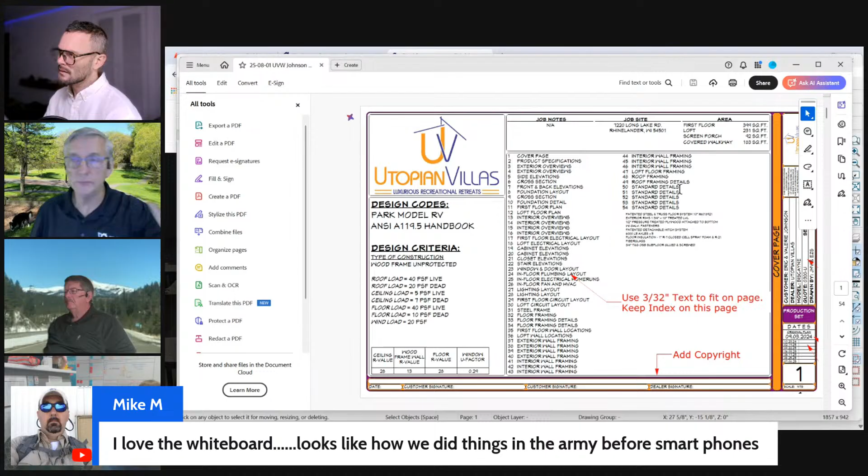Thank you. All right, so a couple of caveats here that we have to be aware of. They are on X15, and I'm going to be doing this in X17. So we'll try to point out some of the things you can't do on X15, but you can do on 17. So a lot of things I'm going to talk about you could do on X15 as well, plus it's all on 11 by 17.

So just keep that in mind, you guys like that size, you want to continue using that size. Some of the things I'm going to say won't apply to your sheets because we already talked about it, but I'll explain some things generally so people can understand.

Is this new construction or remodel? This would be new construction. This is a tiny home that we're going to be talking about. Okay, so that's a tough one.

11 by 17 for new construction, yeah, but they do a ton of detail. So we've got 54 pages that we're working with here. If we can reduce that a little bit by combining some things on different pages or making it fit a little better, we'll try to do that.

But as we run through the different pages, go ahead. You also need to remember that it's a tiny house, so they're still getting the quarter inch scale on 11 by 17 with no problem fitting everything in there. It's still tough to get in there if you're using keynote schedules or schedules in general and you want your eighth inch print size. That's tough, and you'll see some of that here in just a second.

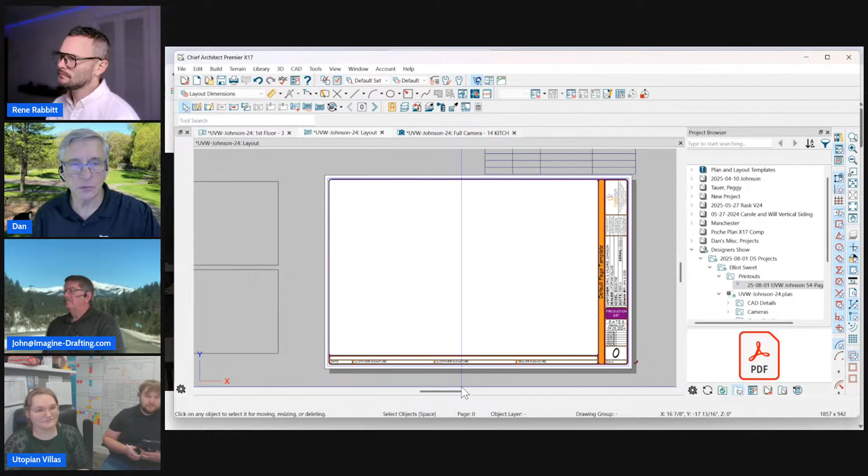So let me start on page 0. Of course, that's your master border. And so down here you're using the page number, which works great when you are using just page numbers, not A1, E1, those kind of lettering.

So the page setup in Chief works fine, the page macro works fine, and that ties into the callouts, which I'm going to talk about in a little bit. If you're going to go more complicated on the page numbering with the A1, E1 kind of letters, you do have to use the layout label. I added it here so you can see both at the bottom of the page.

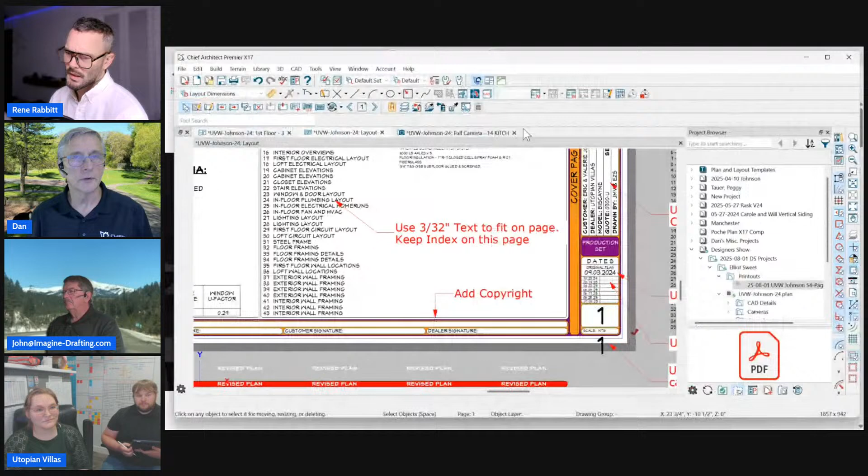So when you use the layout label, that's when you're going to use this icon right here, or you're going to go to Edit page information. Or you're going to go over to your layout pages and right click on the page you're working on and edit that page information. This right here is the same as clicking this icon up here, so they both do the same thing.

So if we go into the page information, the pound sign, this is where you would have set up the page numbering to be different. A-pound sign would be A1, A-pound sign would be A-2. So Chief would start the page numbering over each time it finds a new symbol in front of the pound sign. I don't know if it works after the pound sign or not, but just be aware of that.

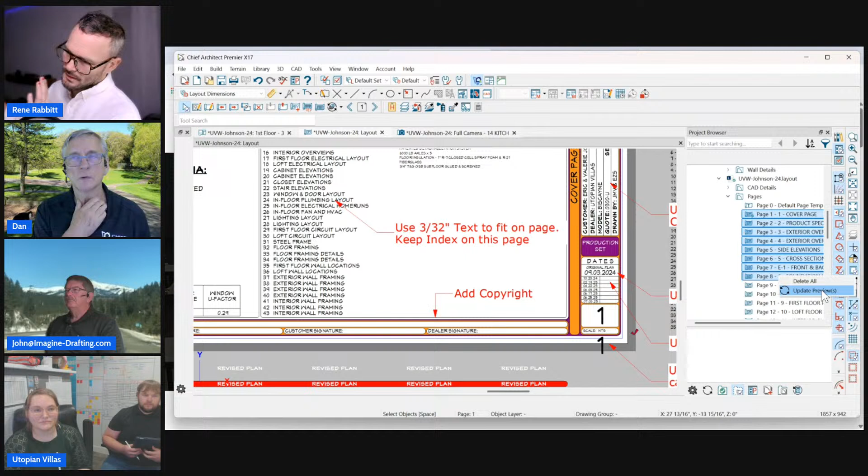Can you group edit page information from the project browser? No, all we could do is delete, and we could update all the previews on the pages we've selected. Unfortunately, if they wanted to delineate A sheets from E sheets, they'd have to go through every page, each one. Unfortunately, it's not a big deal once you do it once, it's part of your template, and you can just work with that. It's almost like there's a suggestion in there somewhere.

But if you're building this from scratch, you get one A pound sign plan page in here, and then duplicate that. Don't make a new page, don't go a new page. Duplicate the page, and the A-pound will already be there, so you'll be able to go with that. So Elliot and Jen, you guys are good with your page numbering setup that you've got, so you wouldn't worry about that.

Let's talk about your indexes. You're on X15, so what I'm going to show you won't work in that version. You would have to update to X17, but there are two suggestions here.

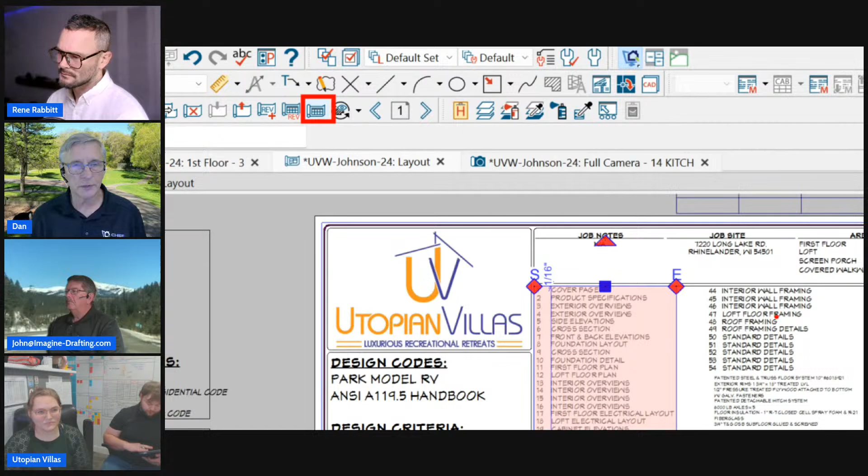All right, so you've got your page index. That's this little icon right here that allows you to add an index of all the pages on your screen. And the index will pick up either the page number or the number that's put in under the pound sign, the label, depending on what you've selected to display the page number.

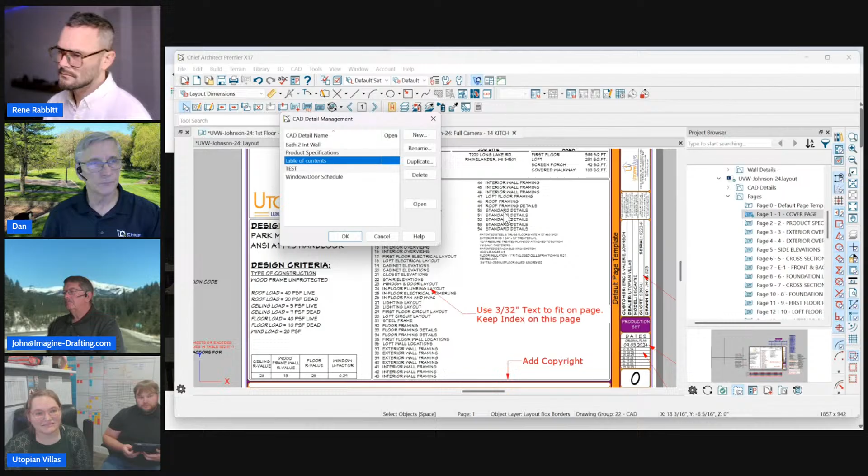So here you see that I did put, I must have changed it back, I had it on one page. But what you could do here, with the text size you've got, is put this in a layout page CAD detail. So that table of contents is in a layout page CAD detail, and I understand why you did that, because you needed to break it to show two different columns. You want to show how that's accomplished, Dan?

That's a good one. Let me show one other thing first.

The text size used here on the layout page was 1/8 inch tall. Now, architectural standards state you could do 3/32 of an inch tall for text size, and that's a standard text size that would work fine for the index. So this is the index at 3/32 of an inch, and that fits in one column. All your 54 pages fit just fine. So that's an FYI for you.

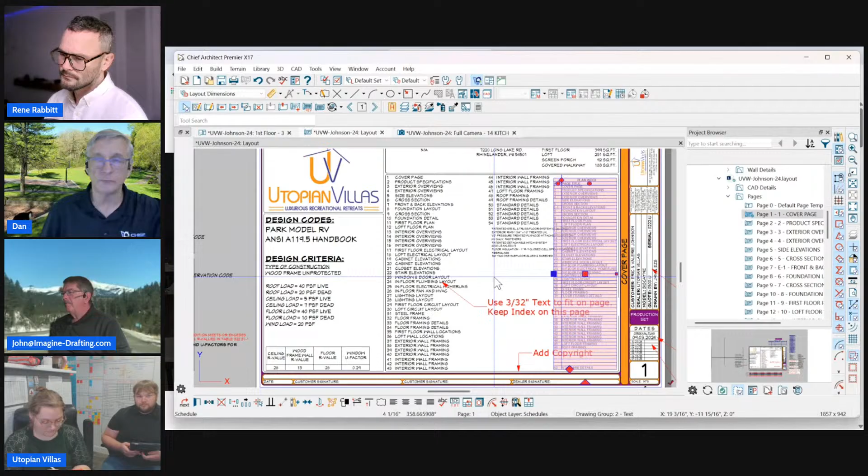So you could go down a little bit smaller on your text, and that gives you one column for all your pages, and then you have a little white space to throw some 3D views or something nice there, maybe some other notes, and then you wouldn't have to break up the columns.

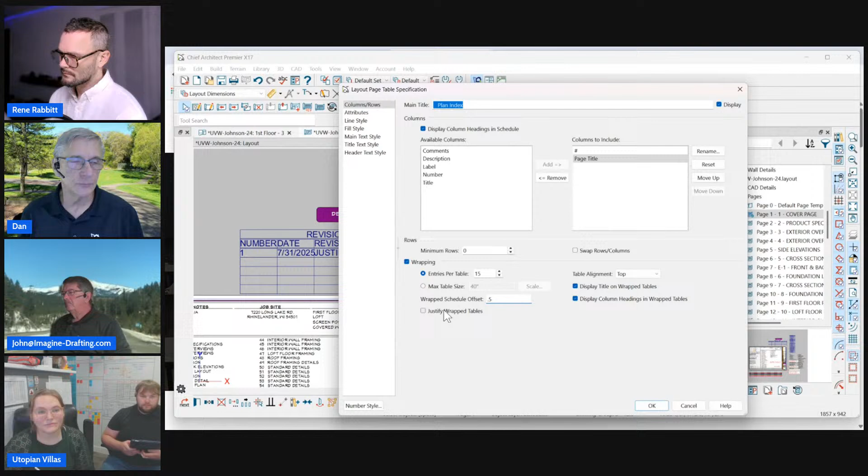Now that we're on a layout page, we were playing with this yesterday where we put in 1/4 inch, and of course it didn't do anything, so we had to put in a big number. Here we're just going to do 1/2 inch because we're on the layout, and that would already give us the space we need between columns. When I click OK, there's your multiple columns of pages automatically, and there's that 1/2 inch space I put between them. I could make that smaller.

This is huge, I think. Chief adding this for all these big schedules people do. Definitely, yeah, that was my favorite feature they introduced. Oh come on, you said other ones were your favorite. What are you doing? No, that was from the get-go, that was the one, yeah that's a good one. That saved me enough time to make up the cost of the software right there. Yeah, and then you start adding some of the other ones in, and before you know it you've got a really good thing going there. So I know Robin really loved that one, she's a big schedule nut, so she loved that one quite a bit.

So you see how that works? Pretty slick. As you keep adding pages, it will automatically start a next column based on the number of sizes of pages that you put in. So that works with all schedules in Chief Architect.

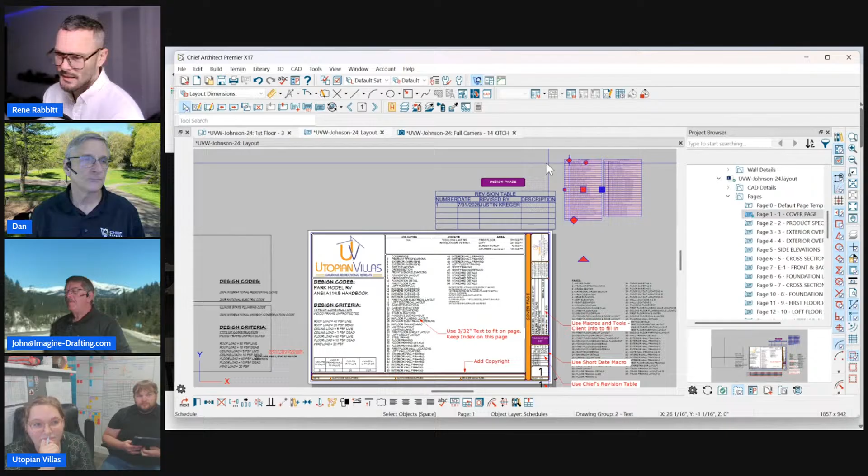Let me break in and say I'm just a huge stickler for standardized text through your layout. Whatever text size you're sending from plan, match that text size in layout, have all the text size be the same. When it starts jumping from scale to scale and size to size, it just becomes more difficult to read for most people. So if you're doing the text in Chief and printing something at 1/4 inch scale, the text size in Chief would be 4.5 inches. Just keep that in mind.

We got a comment here from Lance. What's Lance got? Did you set up multiple template pages that auto number A sheets, E sheets, S sheets? Can you set up multiple what now? Layout templates, template pages that auto number. Yeah, A sheets, E sheets, S sheets, and yes you can.

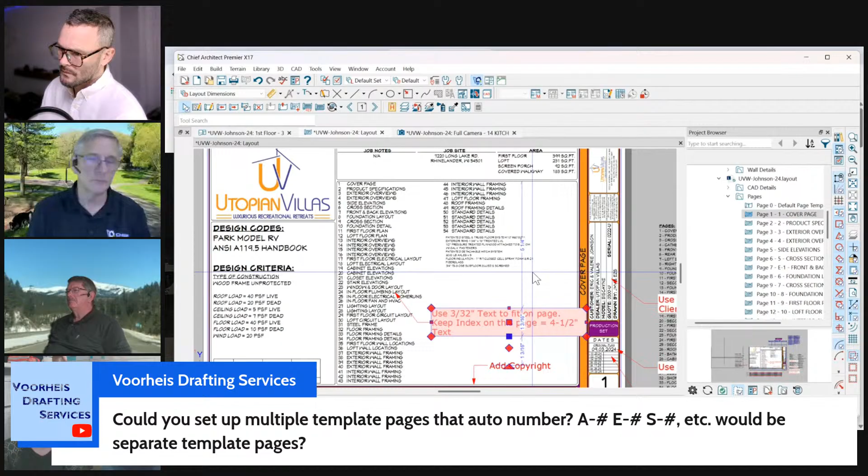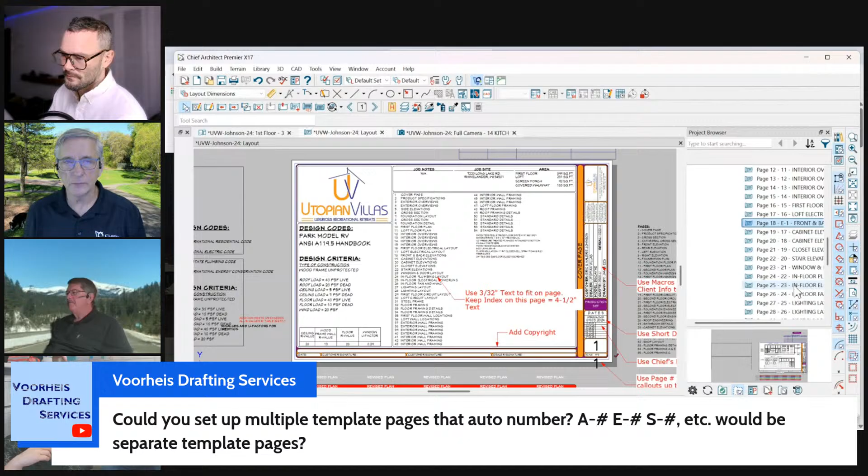Within the same layout, yes, you could have separate layout templates. Although I would probably just start some sheets further down the line that start with your E sheets, that's easier than setting up different template pages. Yeah, and then duplicate them as you go. You can keep it all in one template. Everything's one template, it doesn't matter where you put the next lettering. I could move that down here and it's still going to stay E, and everything else stays lined up. So you can move those pages around anywhere you want, just like Rene was saying, and they'll work just fine. So that's that kind of lettering.

But if you wanted to create separate template pages within the same layout file, all you have to do is go to a page where you've set up a border, go to your page setup, and make that a page template. Now that becomes a new template.

Or actually, that's not quite true. What you would do is name this page—what would it be called? Production specifications. Let's just see how this works. See how everything went away from page 0's information.

And if I go to the next page and want to use that template, I would just go here and select it, say use that template, click OK. Now I'm using that template. So you could switch that up at any time through the process.

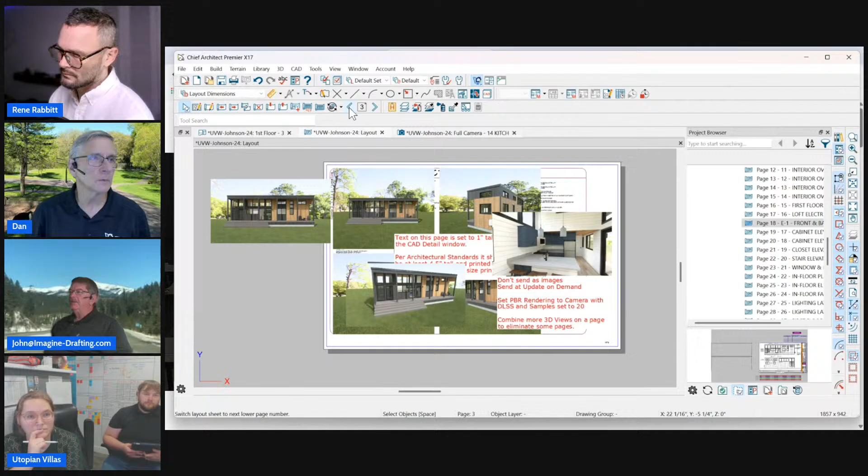And again, for the page lettering, to keep your borders the same and everything, you'd have to go to page 0, copy the borders in your title block, and then paste it onto your new template.

If all you were trying to do is change the number, you could just duplicate page 0. Duplicate page works. Yep, that works too.

So you could do that all day long. Once in a great while, I'll use another template within the same layout where I'm bringing in a survey or something that takes up the whole page and I don't have room for any of my stuff. Then I'll just create a blank template and put that on there. That's about the only time I ever use separate templates in the same file, and it works pretty well.

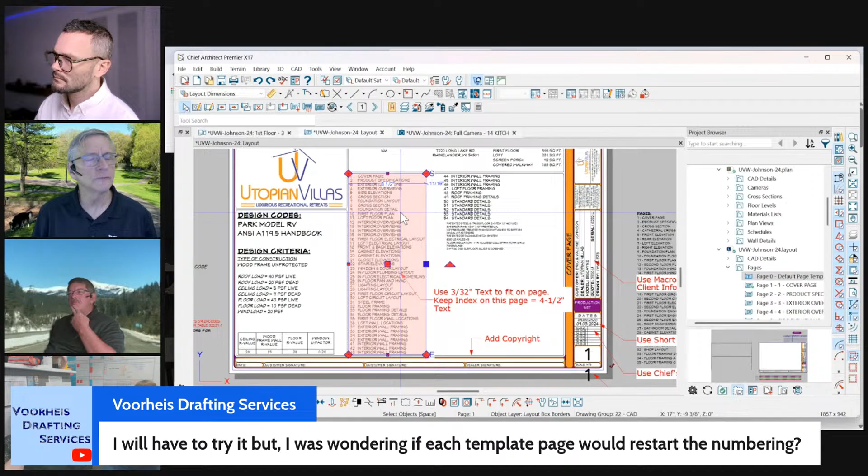So the answer to the question is yes, it would restart the numbering from whatever—actually, it would restart it, wouldn't it? I wonder, would the index pick up all the pages if you're using a new template? I've never looked into that. Why don't you play with that, Rene, while we're talking?

Oh yeah, it does. Okay, so one index keeps everything in order, as long as it's in the same layout file. Okay, cool. Alright, so there's that.

One thing you might want to do for your plans is add a copyright—your company name with a copyright symbol. I think that'd be a good idea for what you guys are doing. You make a little note of it here, like don't make a copy of this or we're going to come and get you. But yeah, you might want to add a copyright symbol to your plan, just like I do.

Let me open one of my layouts. New—here I can open up a different one. I'll just open this. So I just have a little note down here: copyright, my company name, don't make copies of this.

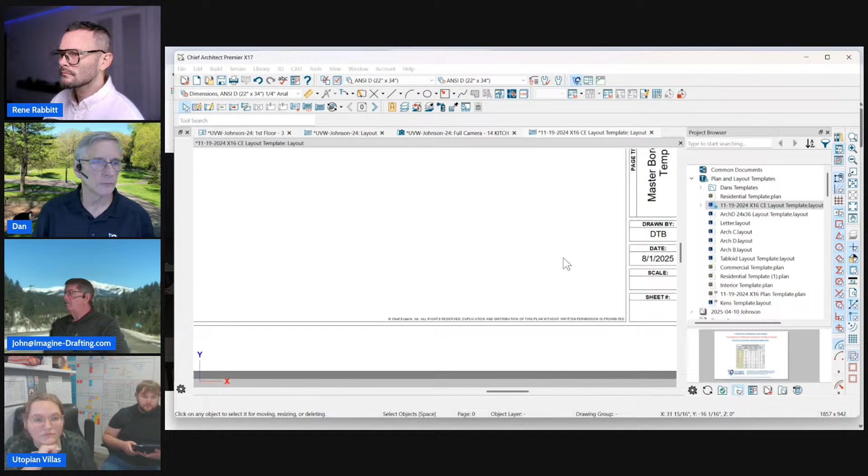Alright, so Margaret had a question too. Yeah, what you got, Margaret? I'm ready—how does the multiple dates auto-populate as you work on different parts on different days? I assume that's what she's getting at.

Well, if you're talking about the dates down here, okay, that's just something on page 0 where they're adding those dates to a little graph they've laid out, so each time you open it and change it, you might go in and change that.

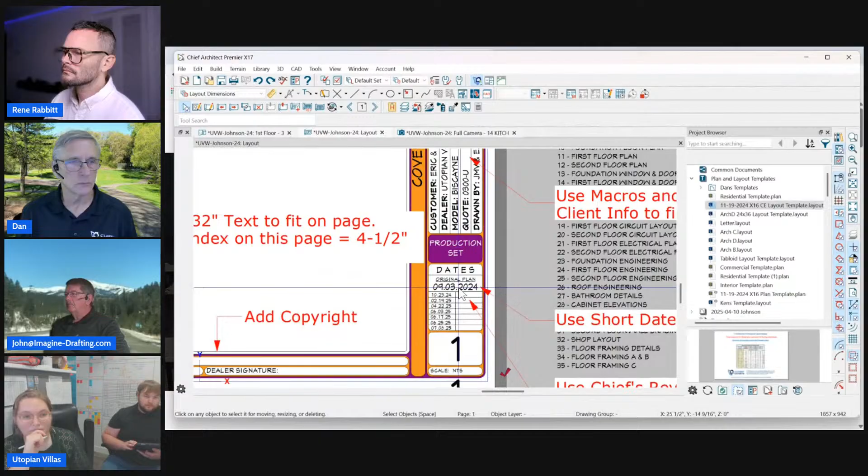I'm the kind of guy who just uses the short date macro. So on page 0, I would put a text box. Let me get a hold of it and open it. So every time I open the plan, it's always going to have the latest date.

So you just go in here, create that macro, global—we want to go to time and date, and I use the short date. So every time you open it, it's always going to put the short date in that box for you. To get this running view here, you'd probably have to create a custom macro for that, right?

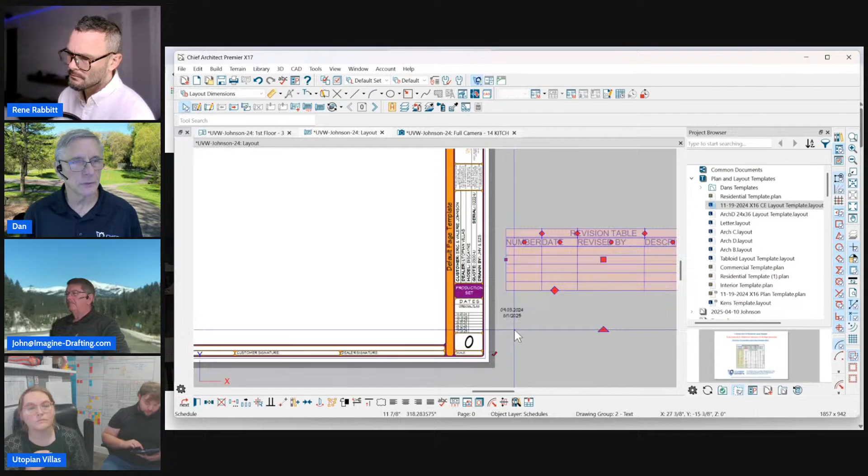To get this, that can be a revision table if you wanted to. Exactly, okay, that's what I was going to say. So you could take this revision table—and the way revision tables work, just make it small to fit in there, adjust the columns so they only have the date. And if you wanted a description, you could have it. So we could remove those and just go date.

And then what you do is, whatever page you're on, you change the size of the text and all that stuff.

So whatever page you're on, that revision table will show up on that page. If it's on page 0, it'll show up on all the pages. And you've got two options here.

One, we could go into the page specifications, and under page revisions, what I could do is create a new revision, and put... let's just put a date there. I'm not sure which column it was. So that's current page. We're only going to put this date on the page that we're on right now.

Or you want to put it so it's on all the pages throughout your entire layout. So you can mix and match these on your revision table. And when you click OK, that's going to show up on your revision table, and you'll be good to go.

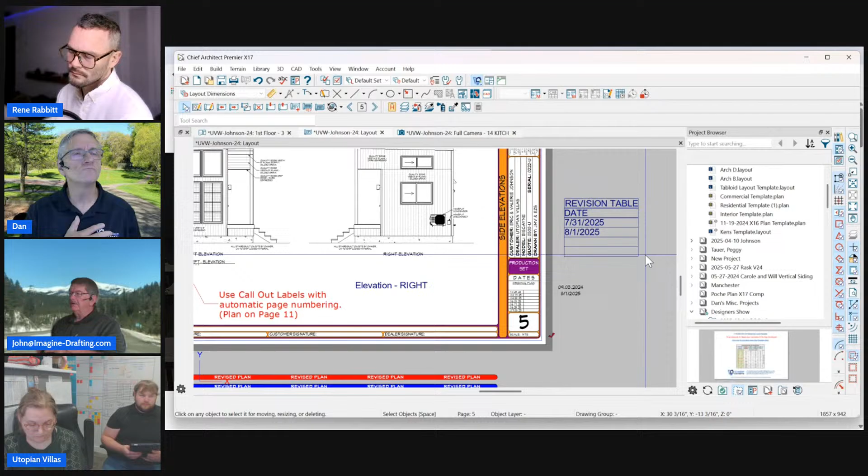So if you wanted to have a master revision table too, would you be able to put another revision table off to the side like this on page 0, and have that populate for all your revisions you've done? I don't know, never tried it.

No, see, it picks up what I put in for this page. I don't know of any. Maybe if it was a different template. What was the question? I missed it.

So you want to have a master revision as well, right? So you can kind of look down chronologically what happened up to everything instead of having to flip through pages. But you also want to just show on that page how that page got changed on each page, right? So you'd have a master one on page 0 off to the side, but that's not going to print. But it gives you chronologically everything that happened.

Yeah, you could put that on page 0 and see everything. That would be a way to do it. You'd have to update it twice though, right? You'd have to put it in for the one and then put it in for the other revision table.

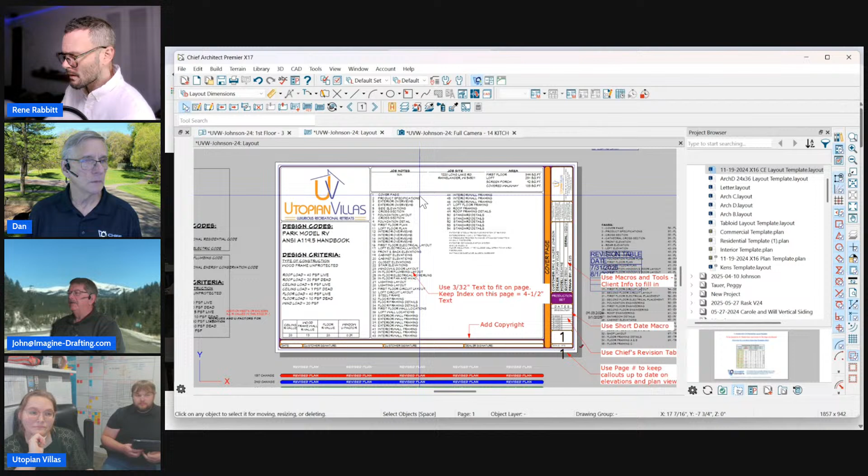Yeah, you just do one master revision table on your page 0 off the sheet if you wanted to see that, and separately copy and paste whatever your date index is. Then go to the sheet and paste that in there. Seems like that would work. All right, what else you got? You could change the size of that.

So, we could use macros for the client info. I use this on all my layouts. It's much easier to fill in the information. All I do is set up a macro. Let me go back to the one I have. Did I have one open? I thought I did, let me go open that again.

Okay, so this is not my layout. All right, come on, Dan. I wasn't planning on opening any other things here, but I'll do it anyway. Come on, man, where in the heck? Just start a new plan. Oh yeah, I could have done that. Let me just open this.

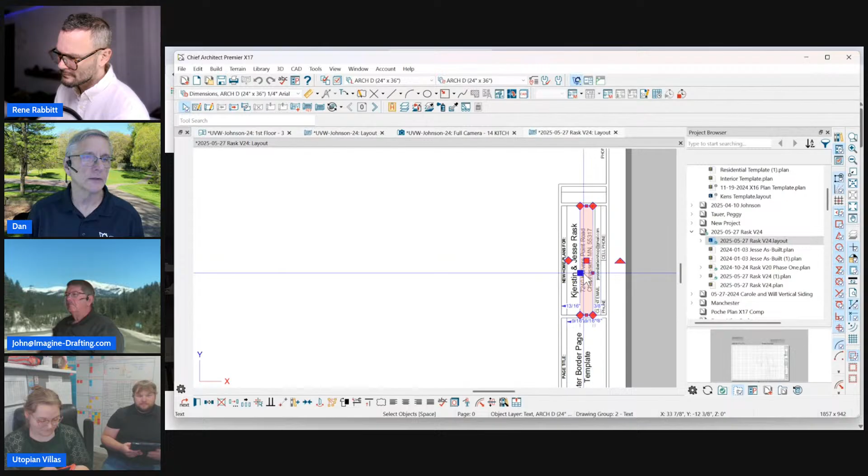So I just create a little text box on page 0. I have a bunch of stuff in here, and in that text box I have macros: client city, client state, all that good stuff. These are text boxes, so if you're going to use... I could do that in rich text, I suppose, and then I would only need one. And here I have the client name.

So whenever I start a new layout, all I do is go up to Tools, then Designer Client Information, and put the client information there. And that fills in the macros automatically. I don't have to go type anything on page 0 or anything like that.

I came up with this because once in a while I'd change page sizes when I'm working on something, and I didn't want to have to deal with retyping all that information. So if I changed page sizes, all of that stuff is still in here. That's kind of how I've set up my template to deal with that.

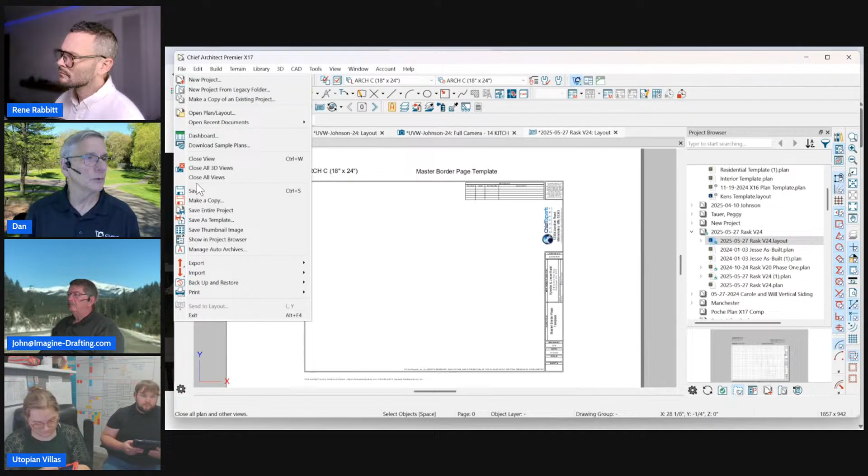So I just have all my borders set up on different layers. All I do when I want to change to a different page size is click that layer set, and it shows that information. I just adjust the page, adjust under print, adjust the drawing sheet setup to the same size as your border, and you're good to go. What was this, 18 by 24?

And everything's good to go. That makes it really simple.

Utopian Villas, are you using some kind of project management software for this, keeping track of these things? Yeah, right now we use Buildertrend. Buildertrend, gotcha. Okay. That's what you're dealing with, aren't you, Rene?

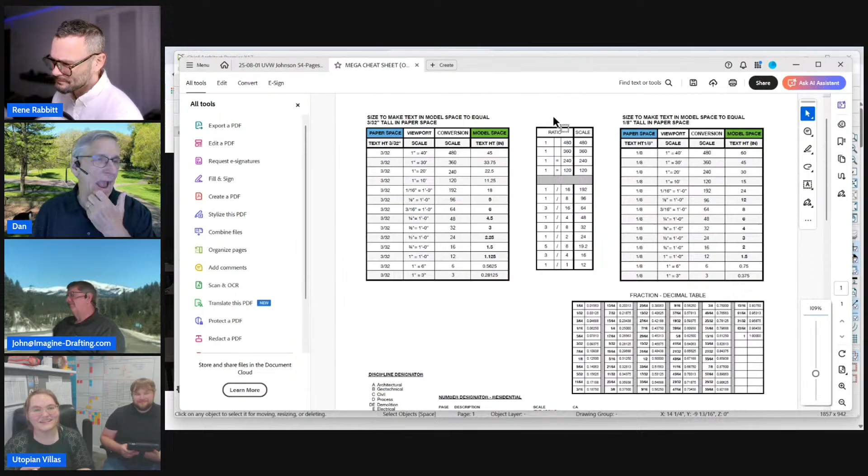Here's what is this? Hey, what is this? Good old Mike. Mike just sent me his cheat sheet of all of the text sizes that he uses. Okay, I kind of have this, yeah.

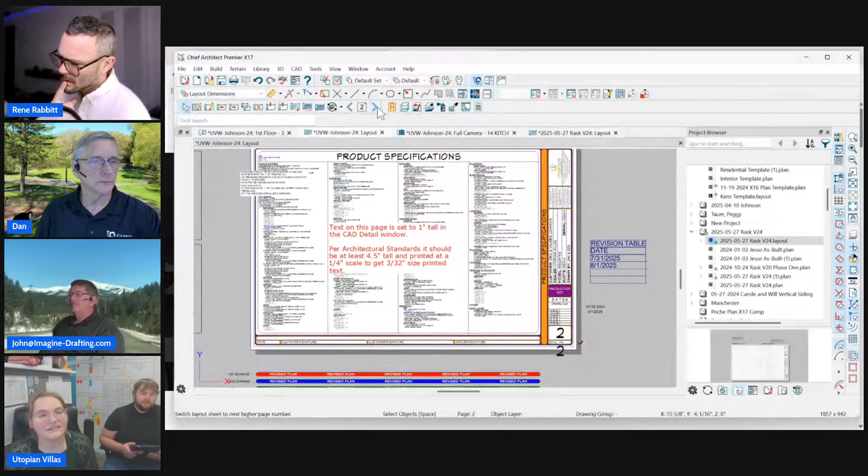Well, actually, go through their layout again, because I noticed something when you were scrolling. Go through a couple pages. Well, probably this page. No, keep going, keep going past. Okay, so it looks like that's a different text scale than the previous page.

Well, this scale, I mean, if we open that to the CAD detail, the text is 1 inch tall. Okay. And it's set up on the layout page at 7/16 equals a foot. So that could be, you could have gone to half on that.

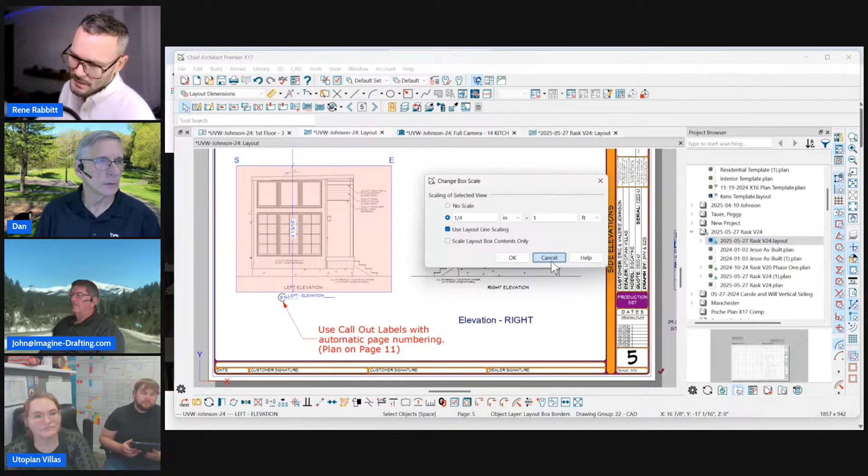Well, and then what's the scale on the previous page? On like this page here. Yeah. Oh no, the two elevations. Because that's a different scale, is it not? I think that is a quarter scale.

Yeah, okay, so there's where your text size differences are. As long as you figure out what your minimum is, these should all just be sent at the same scale if you're using the same text size. My rule of thumb, but we're not using the same text size. No, you're not. My rule of thumb is for all 1/4 inch scale drawings, the goal is to print your text at 3/32 of an inch tall.

For your readable basic text throughout the whole layout, if you have titles or something like that, they could be bigger. So at a 1/4 inch scale, you need to use 4.5 inch text in Chief. So if you want this to print at 3/32 of an inch tall, and we've talked about this, Jen, most people look at your plans on the computer anyway, or on a pad or something like that. But you still print some out, and when you do that, of course they're going to get out the old magnifying glass, or they're going to be using their phone to zoom in on the text so they can read it, and you're okay with that.

Now, if you sent that plan to a building department, they might go no way, we're not going to accept this. So, and I know. Was there a reason to send this at different scales? I mean, it's on the page.

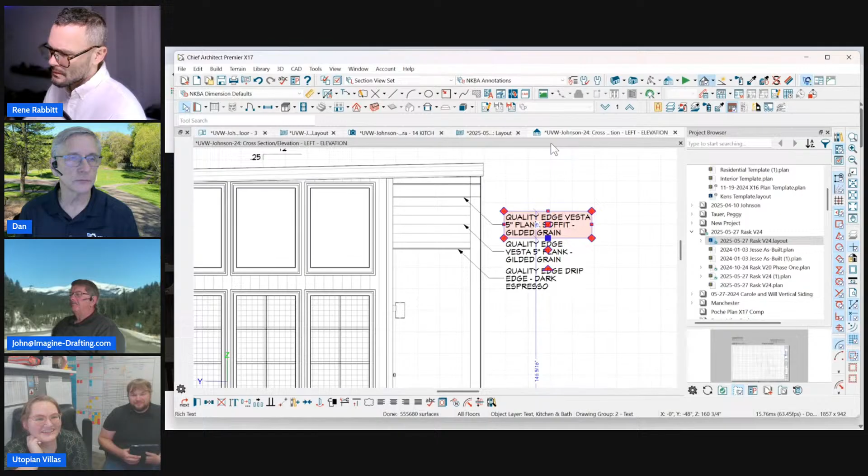Yeah, so when you're looking at this, 3 inch text looks really good. Okay, 3 inch text feels good. But if we change that to 4.5, it's not going to be that much different. I guess it's going to be huge. What do you mean? Yeah, I guess I take that back. Why does that seem so big?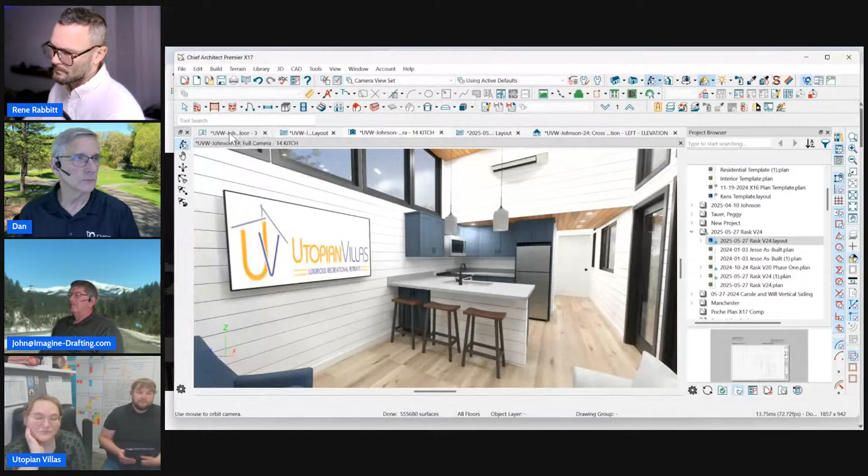Yeah, well, you would send this at a 1/4 inch scale. When you send this at a 1/4 inch scale, it'll be 3/32 of an inch tall. Now, if you're going to do layout and change the scale, if you're going to send this at a 1/2 inch scale, then we do 2 1/4. And then that text size is going to be really small here, but on the layout page, it'll be 3/32 of an inch tall at a 1/2 inch scale. So that's just something to keep in mind as you're doing all of this stuff.

So the reason I was bringing this up is I would just send all these views at the same exact scale and use all the same text size, so everything's just printing the same.

And not only that, but would you want to show the place point feature and what that does for alignment? No, not right now. Okay, put it down and we'll come back to it. All right, but I know what you're talking about.

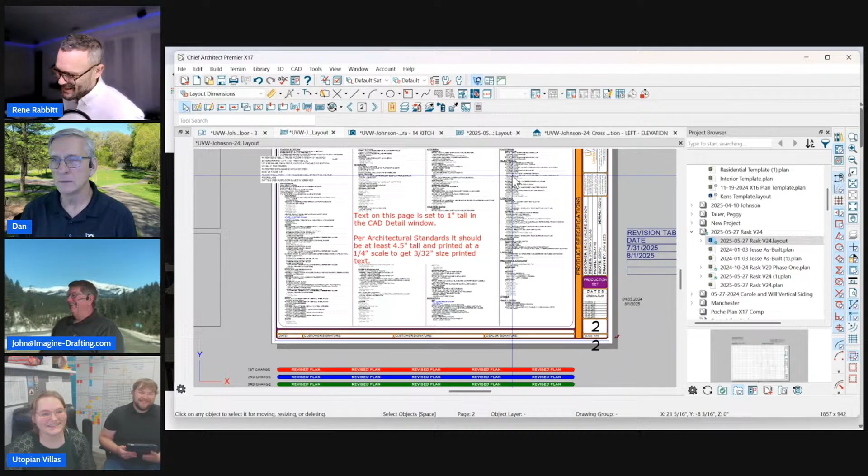I need to ask Chad what he wants us to share. So if you can let us know that, Chad, that'd be great. Oh no, I charge for the Buildertrend thing. You can shoot me an email. Nice try, Chad. Yeah, Chad, I'm trying to milk you for all your money, buddy.

All right, okay, so we've got page numbers, revision table, macros, copyright.

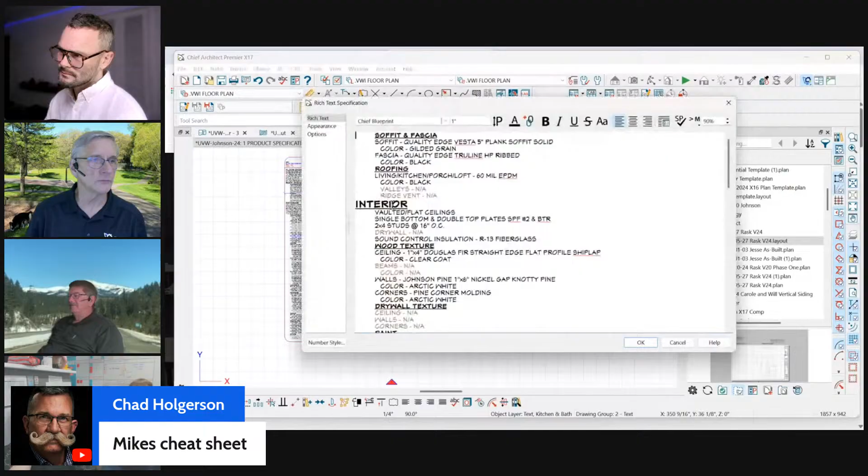Text size here, again, we just talked about text size. So the text size that you've got going here is 1 inch tall in Chief, and it is not to scale on the page at all. It's just fitting the page. You don't have a scale for that on the layout. So, again, you get all the text on one page. If you wanted to go to 3/32, that's how big it would be. When you print it, that's easily readable by anybody. So just an FYI, and you already know that. It's nothing new, but I'm just talking about general standards when it comes to that kind of stuff in a plan.

That PDF, Mike, is that okay if we share that PDF with people? Oh, Mike's cheat sheet, gotcha.

Yeah, let's wait for it. I'll post a Dropbox link. Okay, cool. Thanks, man, Mike. He's too generous. Mike, you're so generous. You are such a good guy, Mike, I tell you. While you're at it, send them some money too. Okay.

So that's a little standards there. 4.5 inch tall, 3/32. We'll print at 1/4 inch scale.

All right, let's talk about your images, because you're doing some really nice renderings, even in X15. And again, what I'm going to show you is an X17 thing, and what I'm going to ultimately show you is that X17 is Windows only with an RTX graphics card.

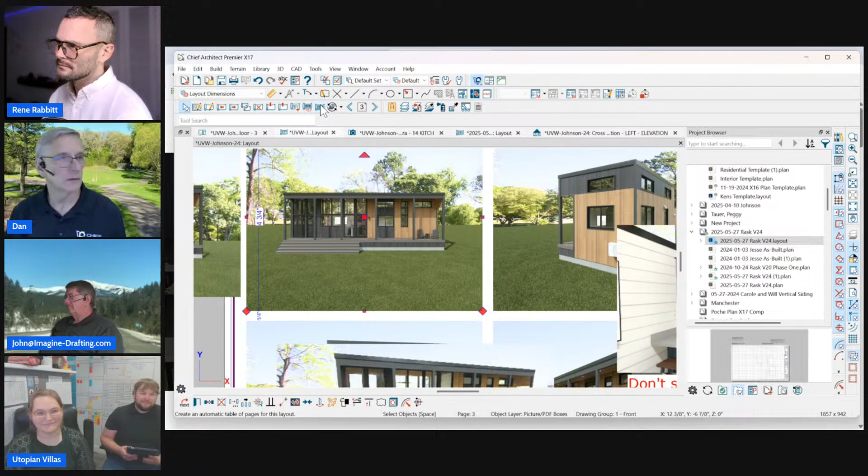And this is the coolest thing you showed me, Rene. I love this. So these you sent to the layout as images. They're not linked to the plan. So if you go change your plan, you have to resend these—you open the camera, resend it. Not a big deal, just kind of a pain in the butt.

This is a Chief rendering that is still linked to the plan and updates instantly. Here's how that works. So when I go into this camera and open it, there's that view. I'm just going to move through it and see how quickly I'm moving through the actual rendered image.

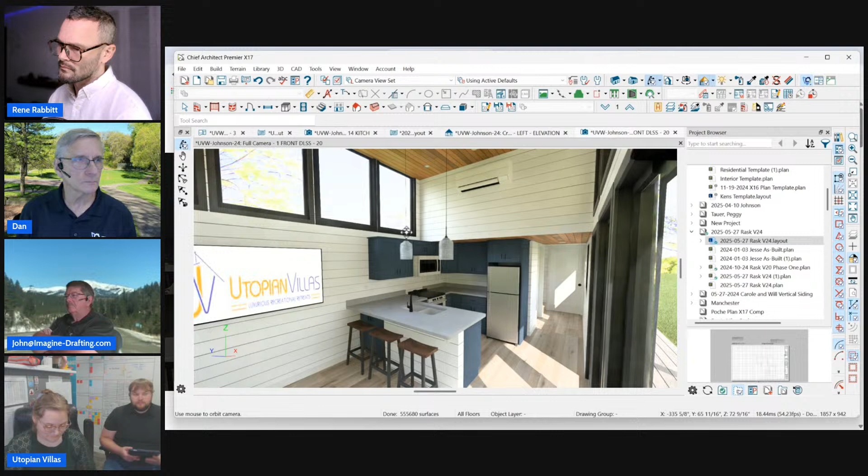I mean, this is a PBR—this is physically based. That's what I'm in right now. And the thing that's different here to make this work so well is when we go to the page settings, any view that you're in—floor plans, elevations, 3D views—you've got this icon right here. I'm in the Chief extended toolbar, and I can change the settings on this page.

So right now we're in the physically based mode. Oh, I don't have shadows—let me turn the shadows on, let me see how that works. Oh, they're always on in physically based. Oh, they are, okay, so I don't even have to think about that. Yeah, all right, cool, I didn't know that.

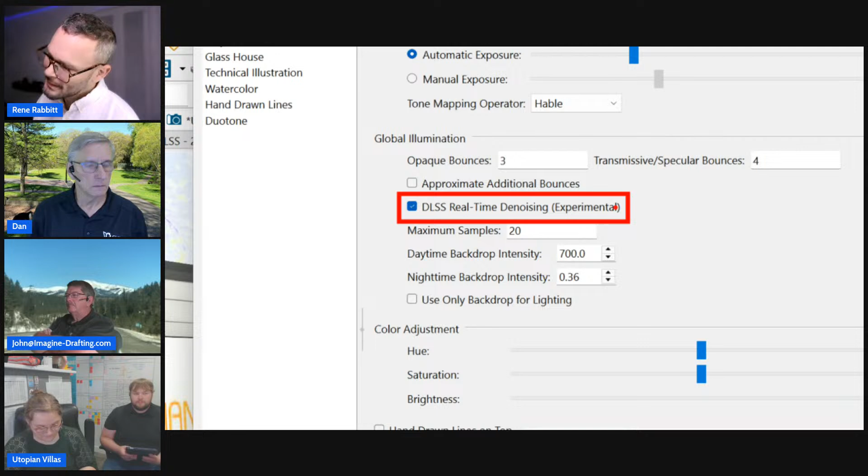Okay, and if we go to define, there's a setting here—you'll see this is X17, it's going to look a bit different than X15. But this thing is brand new; they just sent this out as an update last week when they released Chief. What does DLSS stand for? Real time denoising? Oh, I don't remember, I'm going to have to look that up. Whatever, but it's pretty cool.

So when I turn that off and go back into the view, see how you get the speckles on there? That's called denoising. So the one thing you could do in X15 to create these images and still have them print relatively quick is turn the maximum samples down. It was set at 2,500—turn it down to 20 or 10. So what it'll do, you'll still get it so it looks like this. After 20 passes, you'll see down here in the bottom right corner where it says samples—it was doing 2,500 before it would generate, now it's just 20, and you still get a pretty darn good image at 20 samples. So it's much, much faster.

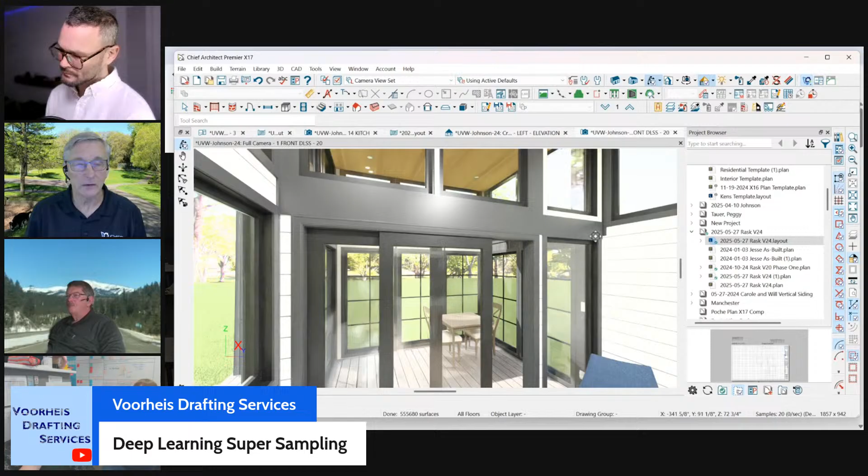You could even go down to 10 and then turn it up when you get to the super duper view. I'm running an RTX 4090 card, so you do need the NVIDIA RTX cards to make this work better. It won't work on a Mac, that new setting, so just be aware of that.

Go to your page settings, go to define, and turn on DLSS real-time denoising. Now you just zip through the plan. It's really cool, nice new feature.

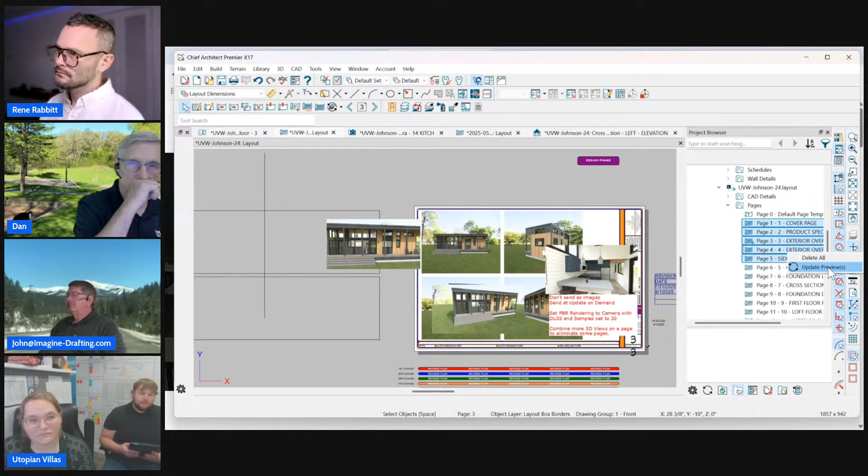You can select all the images on a page you want to update and do them all at one time. Or, as I just noticed, you can select these pages and go to update previews on that page. That's new, that's new in X17 — wasn't there before, so a little FYI for you.

You're doing a beautiful job, by the way, you guys. You should be really proud of yourself. It's a gorgeous tiny house. Yeah, it is. Way to go, it really looks great.

Thank you. So how wide is that one? Oh gosh, 16 feet is the widest you can go, right? Yeah, 16 feet is as wide as we can go, including that side porch walkway. This one's 11'3", and they're using 2x6 walls, and then the porch takes it up to 16.

FYI on porch railings: you'll notice the porch didn't dimension. Chief has a setting for railings called 'no locate,' which means it won't dimension automatically — it won't locate the dimensions automatically. You can still dimension manually, but when I hit redimension, it adds the railings in as well. So keep that in mind when laying things out. Now you're up to 15'5", you could go almost another foot wide.

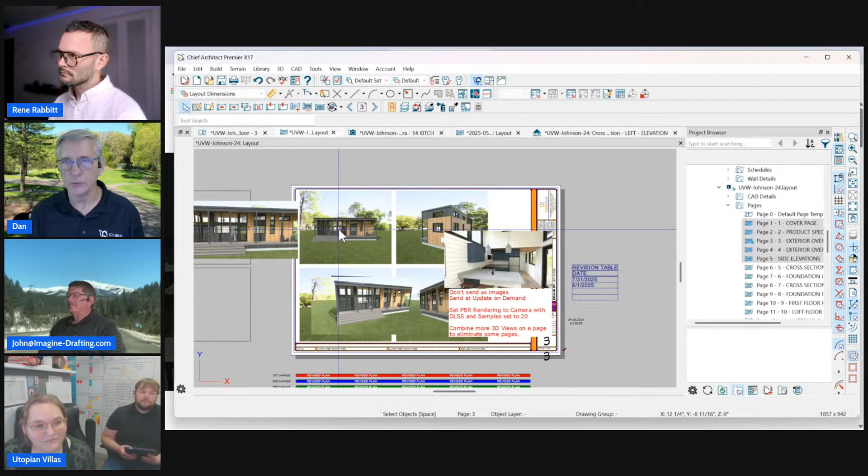Okay, so let's keep moving down the layout, we're already 38 minutes in. I hope that was helpful about the renderings. Even in X15, make sure you set your sample size way down to 10 or 20 — you'll still get great renderings and they won't take very long to generate. Set your layout so you control when they update, not Chief updating it all the time. These are really good looking views, lots of nice windows, so cool.

Use call-out labels — this, you have 54 pages, all right, on 11x17, I get it, that's what you want, so that's fine. I wonder if you did the paper count, if that's about the same square footage if you went to bigger sheets. I don't know, I'm just being facetious here.

It's got to be tough if someone's looking at the floor plan and they want to go find that elevation or that cross section — where do they find that? And for you guys creating a plan, how do you keep the page numbers up to date automatically? That's a goal Chief addressed a long time ago, creating automatic page numbering and callouts from the floor plan to the elevations, 3D views, or CAD details. Is that not what they're doing there? No, they're not doing any callouts, so there's no callouts in any of these sections. So I added this — this is the S1 cross sections. Although you are adding in the label, which is helpful because now I know where that cross section is going.

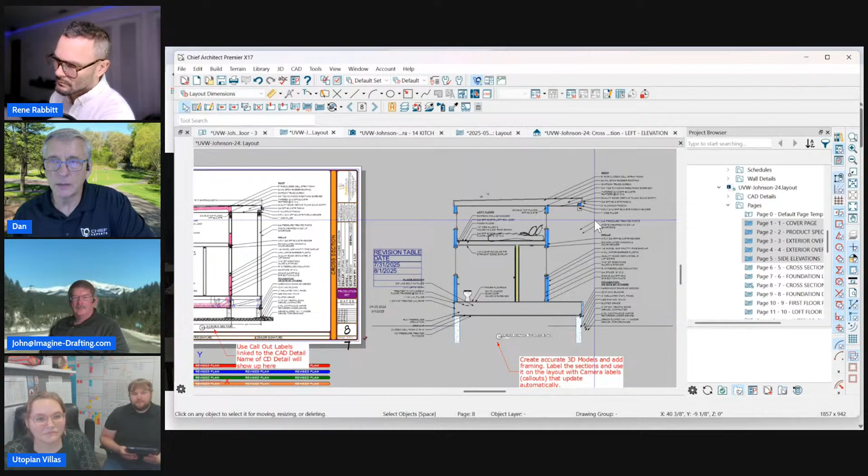But you could do this cross section in a 3D view. You're almost there. This is a CAD detail, but you're almost there in your 3D model. If you just added the 3D framing, you'd pretty much be there. So other than this roof rafter, Chief won't do that automatically, where it would cut that at that angle. So that you'd have to add that manually.

Have you tried doing that with the truss? It wouldn't do it. I mean, it would do the shape. I wonder if we made the bottom chord thick enough or the top chord thick enough. Yeah, you could do it. You would just delete the framing. It's going to make the overall shape.

Yeah, so there's probably workarounds for that, but everything else would work great. I wouldn't have any problem with anything else in the plan here, filling in with the framing properly. Chief does a great job with the framing and 3D models.

So how did you make your call out? So this call out, two ways. Okay, so if you use the camera, the 3D camera, so here's camera, I just label it S1, and it's on page number. I get two different page numbers. Why do I have two different page numbers? You did that. Because I did the E1 somewhere.

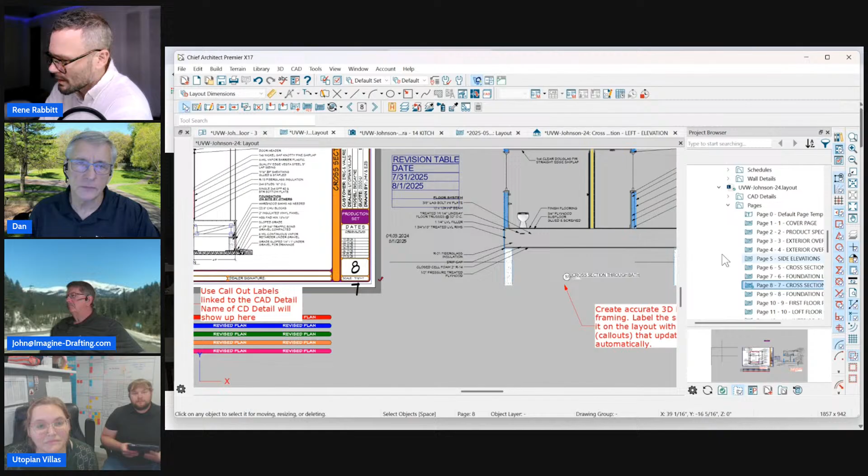Oh, okay. Well, anyway, so when you do a 3D call out, or when you on your floor plan and you do a camera view, where do we go here? So this is the saved camera view. Right, right. So I just use the back clip cross section camera, and I cut through the plan.

Oh, and then what? You sent it off to the side of the page? Yeah, I just moved it over there just so I could show this. Okay, so I just copied and pasted the text here just to give you an idea.

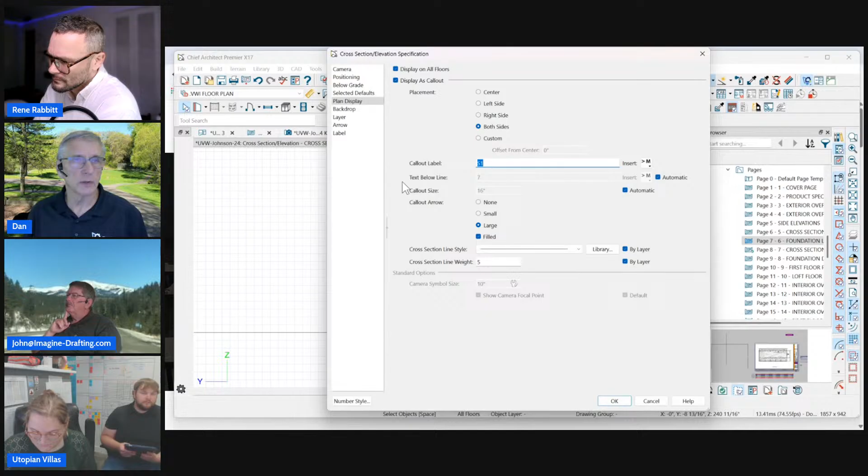And then what you want to do when you're in this view is, again, click on your page information here. All right, and we're going to go here. Whatever you put under camera, this is the label that would show up for that cross section. Then you go to plan display, and I'm going to label it section 1, section 2, section 3, or however you want to label that, A, B, C, D. And then you're going to leave the page text below line set to automatic, because this is where it picks up the page number automatically. So whatever you put in the page.

So I think we missed some description here, is that they have a cross section. They did CAD to view so that they could detail it, and then they sent their CAD to their layout. That's the other one, I'm going to get to that. I'm going to get to that in a second, Rene. Okay, I'm showing both. One from a 3D camera and one from a CAD detail.

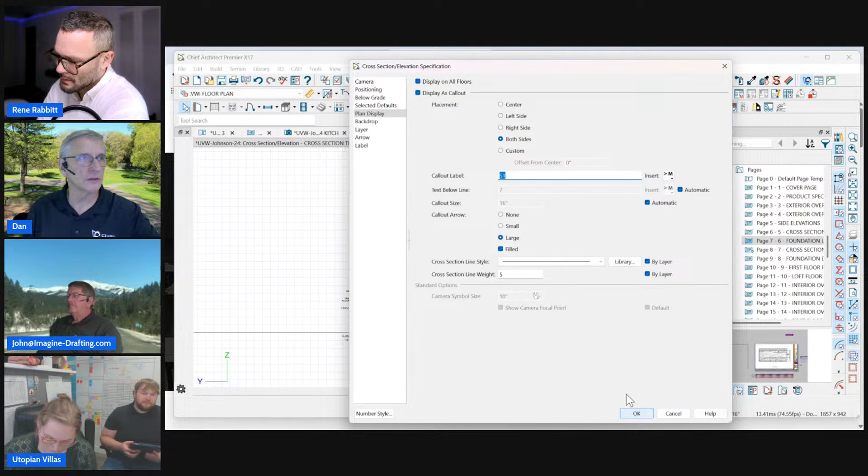Okay, because you showed me the CAD detail one, and I love that. I didn't even realize they did that. So, but this is camera. Okay, so this is automatic from the saved camera. And then I made the cross section or the call out on both sides. So that's from, so when I look at this call out, that is the saved camera. This next one is just a call out. It's not a saved camera. And I'll explain that in just a second.

So back on the layout, so when I send this view to the layout now, and we go to the floor plan, see how it shows that call out there? And if I move my page numbers here, if I move my pages on my list, see the call out updates automatically. Why did that update to the wrong one?

You got that template in between all these that you need to move out of it. Am I moving the wrong page? Let's see. Oh, they changed that. The one that move, the one that says side elevations. Yeah, here we go. That's the one you copied, wasn't it? Yeah, I don't know, whatever.

I'm just seeing if I move it though. It's moving it, so it's got something to do with that extra thing I put in there. But it'll, yeah, the bottom thing is automatic in the callouts.

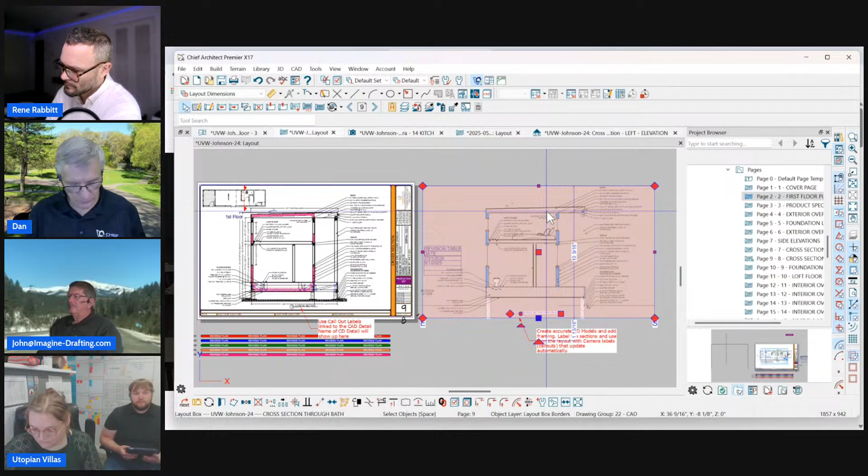Now the thing that you have to do to these views, like for the elevation views, for that, let me go to that cross section back here. So the thing you have to do here in this cross section view is open this dialog, and this is in X15 as well. So you would go back to the label, you click on the view, go to label, use call out, hit edit, and then make your adjustments here.

Whatever this is going to pick up the name of the call out, that's what it's going to put here. How'd you get that? Well, it was there.

But to get it, you go global, object specific. Object or reference view call out labels. Yep, it's in object specific. There it is. Reference view call out label. So whatever was typed in the back where I created that camera, it's going to be filling that in.

And then attributes, just adjust your text. You play with this a couple times and you'll get it. It's pretty straightforward, and the cool thing is it shows you what it's going to look like on your plan right here.

So now in my call out here, I don't put the page number underneath it because the page number is already on the page. It's right down here in the bottom corner, so I don't need to have both in that call out. I've seen it done both ways, where there's a page number and no page number. All right, so that's that one.

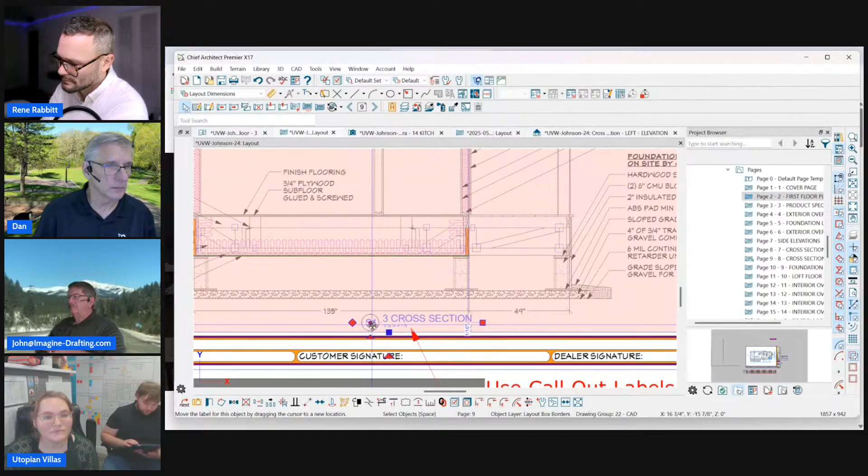Let's go talk about this one now, how we added this one. Okay, so I had to remember how to do this. So when I use the call out here, I go edit. Let me, Rene, help me out here. How did I do this one again?

Start with place the call out first. So go back to your plan. Yep, that's what I did. Here it is, and I placed a call out. I would go up to the text tool next to the text, and I grab the call out. You can do a new one. All right, and I just click on the screen.

And then we go to, I made it a double call out, so it has call outs on both ends. And then I made it have a large arrow, and then I want one arrow. Okay, so it adds the arrow. You can add multiple arrows to it.

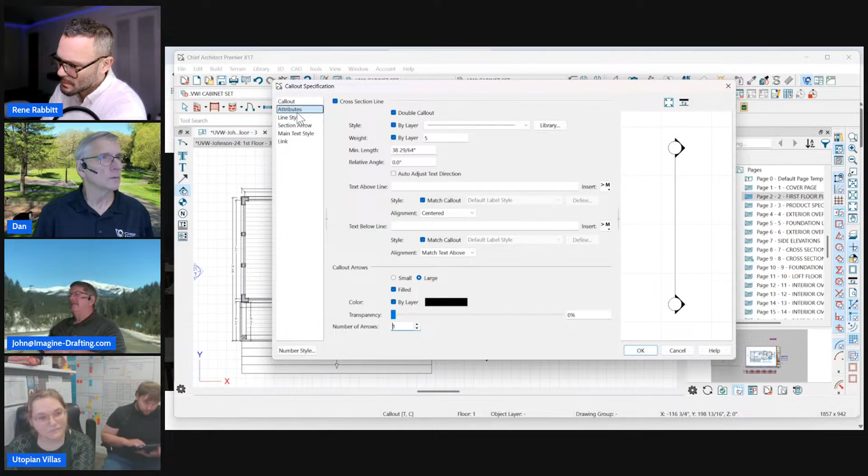I went to text above line. I don't want it to look like a camera arrow, I don't like that arrow. Well, tough, pick a different one. What's a different one? Pick a regular call out instead of a camera one. Small, you mean? You want a small, got an arrow? This just got an arrow and not the... Yeah, but that would put the call out somewhere else. Never mind, never mind, we'll do that later.

Line style, let's see, attributes. What am I doing now, Rene? Text above line, you're gonna link. Oh, I got to go call out first, and like, so this is section 1. Okay, so whatever I put there will show up in the call out.

Now we got to link it to something, and we're going to link it to your CAD detail. Can you do this in X15? I don't remember if it was back then. Okay, so that was there in X15.

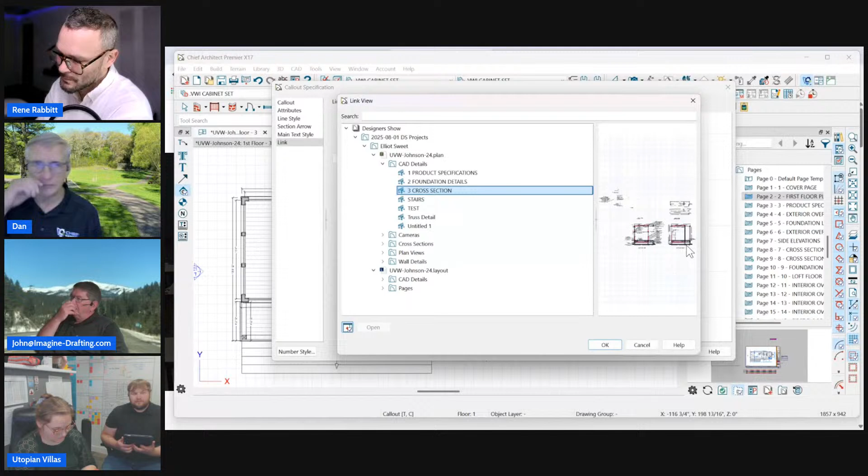So then whatever detail... now put your cross sections in separate details. You still draw them in one, but copy, create a second detail out of it. So each detail has its own name if you're going to use this call out method. And again, the advantage of this is it makes it easier for people to find your details from where they go, because they'll have the right page number, and your page numbers are always automatic.

And once you get this set up, it's like done, I mean, you don't have to mess with it at all. Not only that, but when you're doing your cross sections, put them in the same exact XY coordinate. That way, it's easy to just copy the one cross section as it's sent to layout to the next page and link it to your other cross section CAD detail, and you won't even have to shift it around. It'll be in the same exact XY space on sheet space.

Yeah, so I'm sure that didn't make any sense to anybody, but did that one more time, Rene. We got time, maybe can you show that in a couple minutes, Rene? I can, but go ahead and finish the process here.

So I'm going to go, I need to put that call out on a layer. I think I had one set of text call outs right here. There you go, so now that'll give you the right size that you want. And here we do want to have a page number in there, okay, because this is on the floor plan, so we need to know which page number of the layout it is.

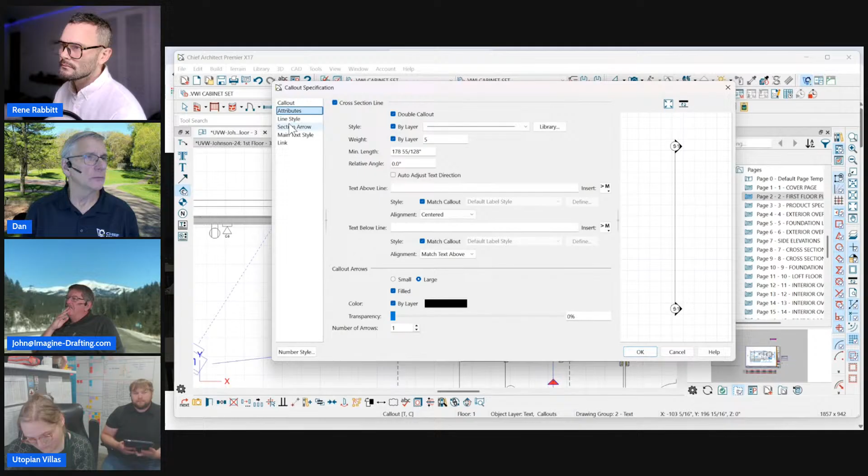So then we go back into here, where was that again? Call out attributes—oh, where did I do that? I did that quick before and don't remember. Main text link, yeah, it's under the label. It's not in this part, it's in the label. You got to get to the label part of the call out. Oh, text below line, that's what I got it to.

Okay, I'm using a macro. I'm using global layout info, layout page number. Is that what I'm using? Or layout page label if you're using the label. Yeah.

Put the line there. It's not going to show because you don't have a link yet, possibly, or you're linking it to something that's not sent. You're in the plan right now, you haven't sent that to the layout yet. I'm not sending that to the layout, it just links to the page automatically.

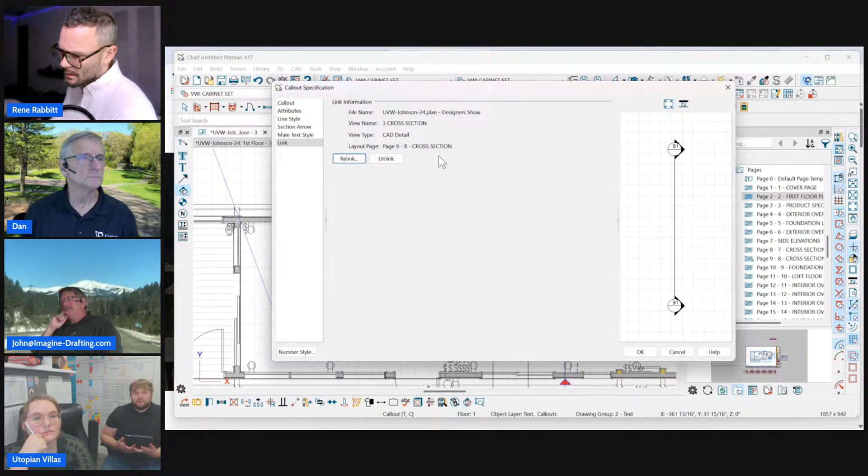Before I chose a page, how did I choose a page? Go ahead and hit link at the bottom panel. Relink, okay, so you have linked it to something. I linked it to the CAD detail. Right, and you haven't sent that CAD detail to the layout yet. Yeah, I did—view name 3 cross section.

Let me double check it. Yeah, well it's on that layout, it's that CAD detail right there. Okay, I knew I was going to do this when I got to this point. How did I link that to the layout page? It was under attributes—oh, here, let me go to the one that I did it to. That'd be easy.

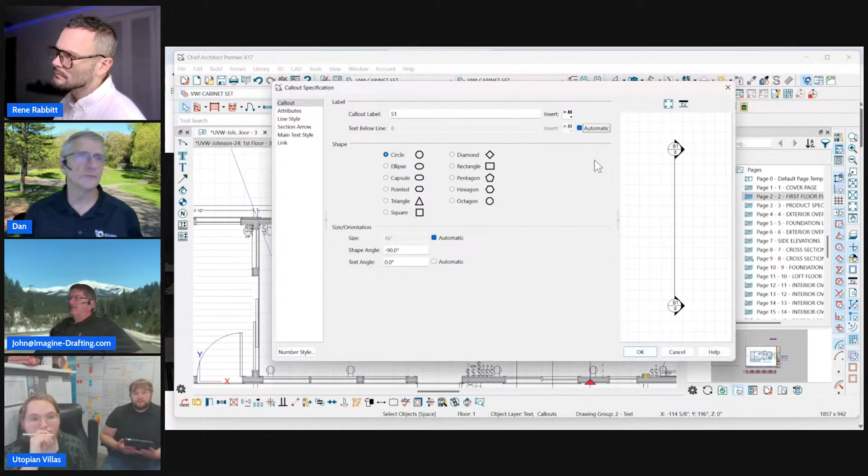So I'm linking it to a layout page under call out. It's always checked automatic—oh, I checked automatic. And that's going to, so right here you have to add it to the text block. I just need to check automatic and it'll put the page number in for that CAD detail, because I'm linking this to the CAD detail and it knows what page the CAD detail's on.

So if I move that page, linked view layout page number—yeah, so if I move that around now, that'll change that page number. Okay, so there we go. I knew there was some step I just missed there. I haven't done this for a long time, so I had to rethink that one.

So is there a way to make the S1 part of that call out automatic, like if you were to make a copy or place a new one or anything like that? I mean, there is, but it's very complicated. It's easier just to say I want this to be S1, S2, S3. Just label it—you do it once and you're done within your plan, so you don't have to mess with it anymore.

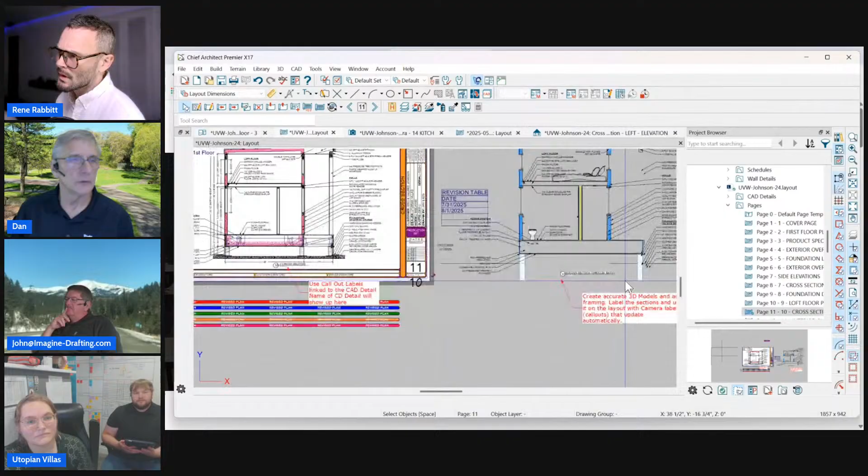What else did I have? You want me to show that real quick? Yeah, if you want to. Why don't you take the screen? And we'll kick here—there we go. And we got to get them back in the stage.

Cool, okay, so I think this was one of them, I believe. Yeah. So we have two details on this page, we want to split them up. Let me just get this.

This is UVW Johnson, is that right? Yeah, and this is cross-section details. Okay, I'm just going to make a copy of cross-section details, and instead it's going to be, cut through bath as an example. That name is what will show up on the label of the call out. And so instead of this being cross-section, I could rename this to cut through kitchen.

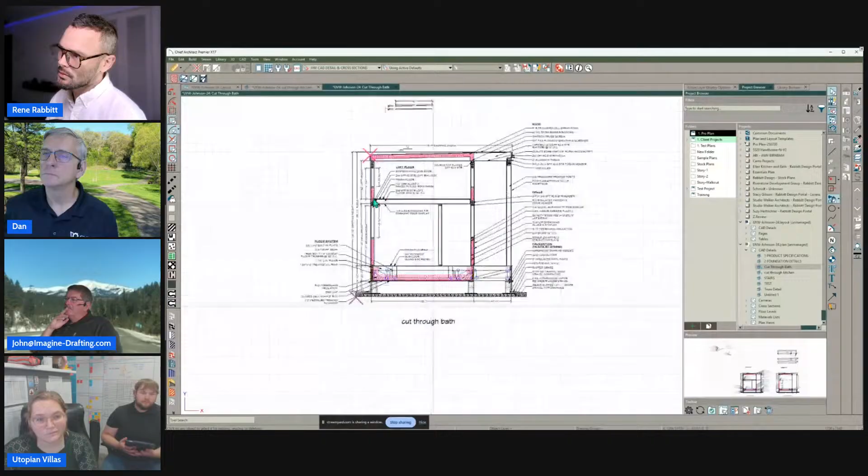And so I want to open up cut through bath, and that's what I have open right now. So I'm going to end up placing a point where cut through kitchen is right there, and I'll maybe even place another reference point right up here. That's just letting me know I want to align this detail over here with those two points. So I'm going to select everything here, delete it, select everything here, and do a point to point, so now these are in the same coordinate space. So cut through bath is now in the same coordinate space as cut through kitchen.

So if I come back to layout, and here, if I relink this or make sure that it's relinking this—do not import. It's going to do something. This is X17 fighting me. They want it to be into a new project, I guess. What? This is all new—this is all new to me. It's forcing these open plan and layout files into a new project.

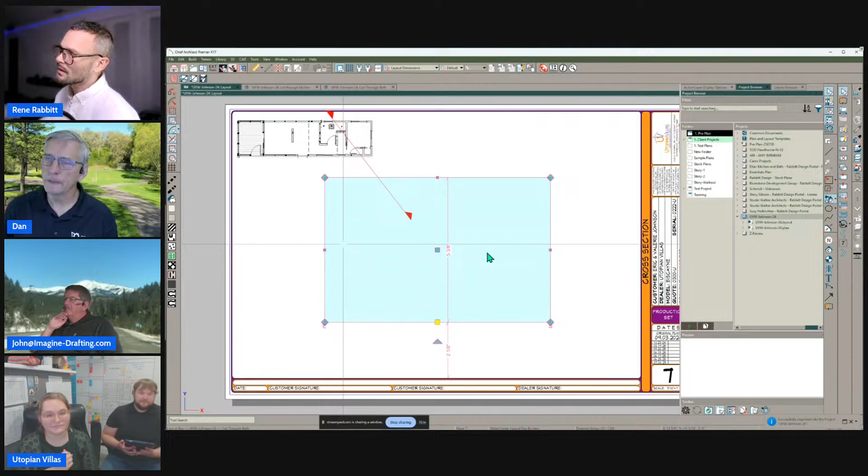It's taking its sweet time. Okay, so I should be able to relink this to cut through bath if it was in the same space. Did you do the right one there? Oh, I probably did the wrong one. Just make your viewport bigger. There we go.

Okay, so this is what would be showing, right? We're going to clip our layout box to what it needs to be. There we go. So now I should be able to just relink to cut through bath, and it will be in the same space.

Kind of get the idea, but yeah. Don't you just love it when stuff doesn't work? That's funny. Well, and it's there. So I think you moved it to the right side, and I think that viewport was on the left side.

Look at the preview when I do it. This looks like it might be a glitch. Oh, it's not. I had some trouble with some 3D views too, not cooperating. So it could be a glitch in the new update they just put up. Sorry, Chief. They hate it when we find glitches on our show.

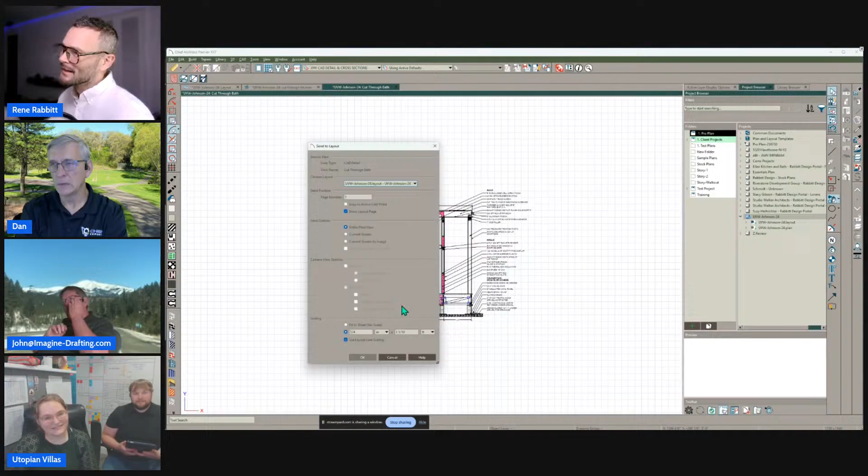I'm going to see if I can't get this to just show up. There we go, that showed up. Let me see if I can't conform the other view now. There's cut through kitchen, this was cut through bath. I'm just going to get rid of your excess details here and see what happens.

All right, now let me try to relink this to cut through kitchen. And part of what you're seeing here is the relationship of layout page viewports or boxes to other items in your plan. Yeah, I had that same issue go on with a 3D camera before too.

Well, this should work in X17 anyways. If it's a camera, update the camera. I tried that too. No, it's a CAD detail. CAD detail, no, this is absolutely a glitch, I don't know what's going on. CAD details are like floor plans. So yeah, right.

But anyway, the idea was to have a different detail that you could just change what's in it, and everything shows up in the same place, keeps in the same coordinate space. That's kind of what he was trying to do. So what's the benefit of that?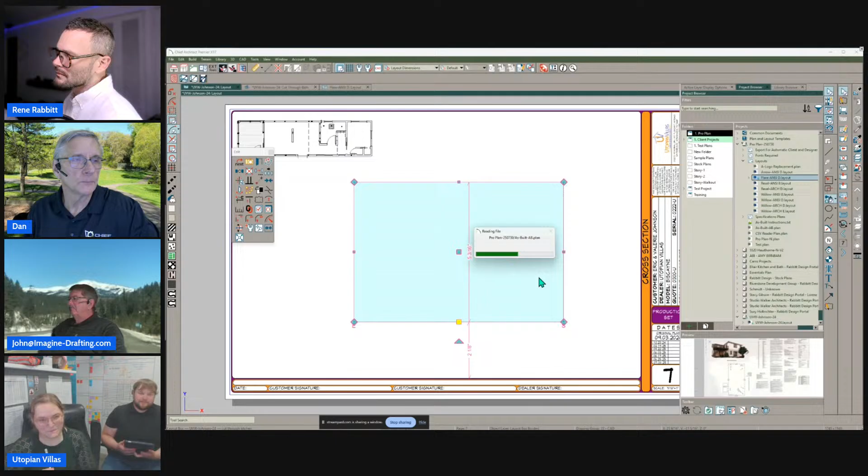Well, okay, I'll show you just in one of my template plans real quick. The benefit is just being able to copy paste some views and keep everything aligned. So if I flip through, say I want my floor plan keynotes to be where this keynotes elevations is - if this is in the same XY space in a CAD detail, when we relink it to some other detail, I'm going to relink this to my keynotes for foundation instead. If they're drawn in the same space, look, it just shows up.

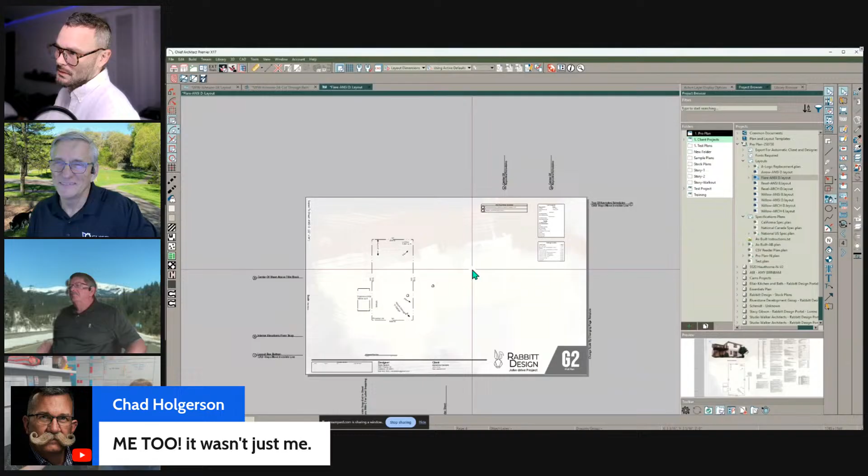Yeah, and if you have your layout and your plan templates synced, you can also just re-reference a plan and it'll pretty much auto-populate, correct? Right. So the convenience factor of this is, especially if we want to keep everything in alignment, which is a big thing for me, is if I were to go draw something, so that we can see this, that I've got some building here.

Then if I get into layout, that's already sent - this floor plan keynotes is already here. If I copy this and bring this forward a number of pages to some blank page and paste hold, now I get to change what this is referencing, which means I can say that this is referencing the electrical plan, and it's in the exact same point-to-point space.

Right, exactly. So I put in a little place point, which this is another glitch I just found out - the place point's not picking up snaps on our plan view anymore. Don't know why. Sorry, Chief. There we go. But there we go - you can see all my views are aligned on every page.

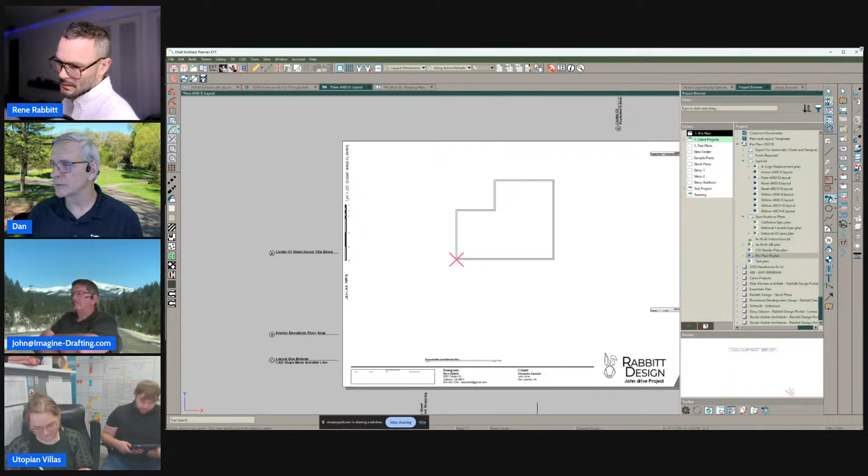Yeah, not to confuse you, but most of what we talked about you could do in X15. But if you guys decide to move forward to 17, you'll see some benefits there. So when I go file print, this is something I've not seen before. I don't know if it's new, but save to project assets - what is that?

That's to your asset manager in Chief X17. Okay, and then I click that, and now I have save to project. I get that, save to assets. Trying to figure out where that is.

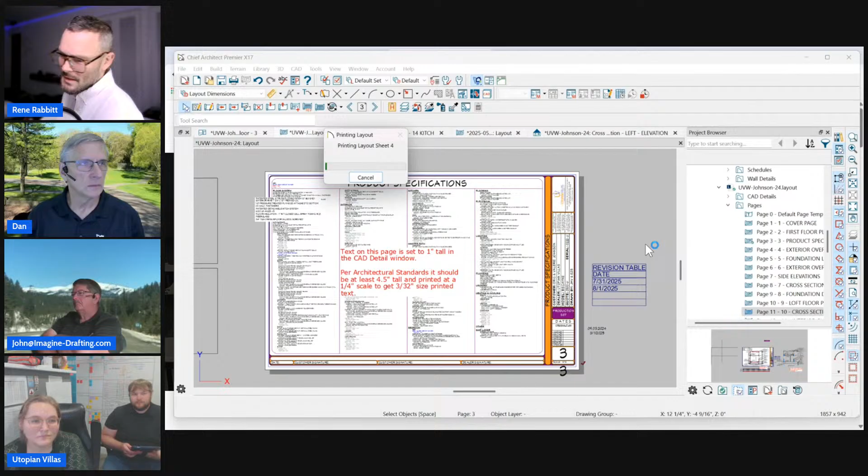That's asset manager, so press OK real quick. Okay, and go to Tools menu. Hold on, it's doing it. It's finishing printing 50 million pages because someone doesn't want to size their sheet. Got you guys there, that's all right. Okay, so there it is.

So if I go to Tools, there's Asset Management. Now you'll see that PDF in there, so you could send a particular page to some layout if you wanted to. This is everything that's included in this plan plus, so this would be like your general textures or something like that, that's going to always be the same. You would use that.

A good thing to import into Asset Manager is maybe you want to send nailing schedules in on a project by project basis, that would be an example. Maybe you've got a moment frame PDF that you want to send on a project by project basis. You would import that into the Asset Manager, it's just easier to access that way.

Look at all these assets that aren't linked to anything. Chief's not finding them. Wow, all right, what were you trying to show them? You were going to show them something. Just wanting to learn what the asset management thing was, that's all I was curious about.

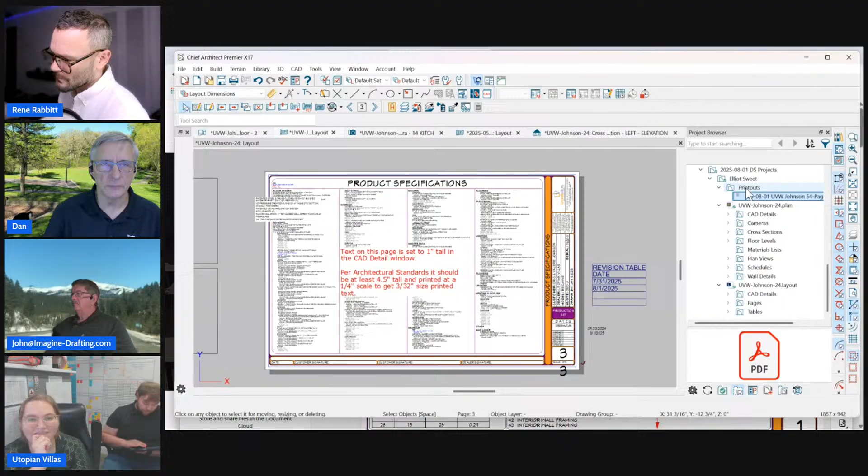Yeah, so I just saved a project. That was easy because you could create a folder and have all your PDFs in one folder or whatever. Looks like I could import pictures, I could import anything I want and keep it with that project. So there's Elliot's project, there it is. I can keep all those things within the project, just like keeping them in a folder on my computer. So that's kind of nice. I like that.

If I just do asset management, it becomes available for any project, right, Rene? Yeah, yeah, so these are your assets.

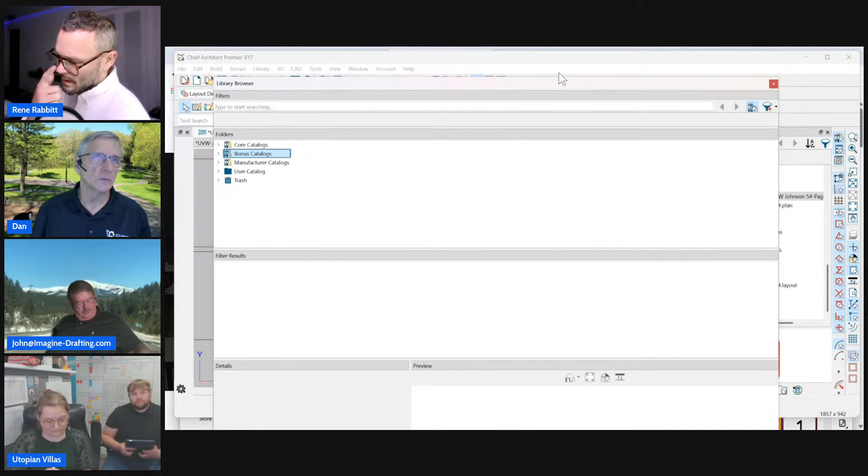All of these libraries, Chief doesn't back up the catalogs, does it? When you do a complete backup of everything, where it says backup assets at the end of the day when you close out of Chief - what are you asking about it? When you close out of Chief, it asks you if you want to back up everything. So it's going to back up all of the catalogs? Everything? No, it indexes your catalogs so that it knows what catalogs you have downloaded, and therefore it could re-download those catalogs.

The things that will back up directly are in Asset Manager, which are any kind of text, any kind of image files, any kind of PDFs, that'll back up. Your library will back up - that's your full library, including all the textures that are part of that library, which are being cross-referenced to your textures directory in this case. And then it backs up your project files as well.

Mike's going to finally get his caffeine fix. Attaboy, Mike.

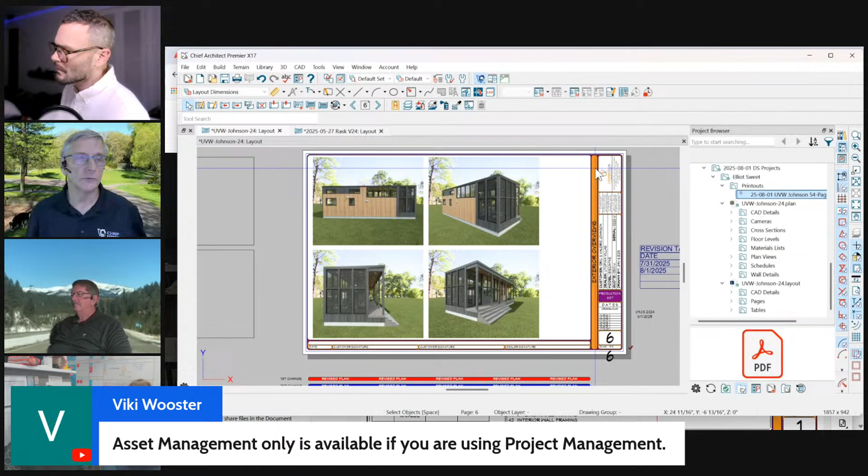It might be, you mentioned info about creating a set of working drawings - if you go to the designer show and go back, just type ASID in there, and someone from ASID came on and did a great show about things you should include in a plan. So go watch that, that was a really good show.

With that, I think, any questions, Elliot and Jen, do you have any questions you'd like to throw out at us? Pretty helpful, lots of things we can improve on, like the readability, and as I mentioned, you guys are doing a great set of plans. I mean, you guys are building some really nice structures, really great design, a lot of nice features. Just keep up the good work.

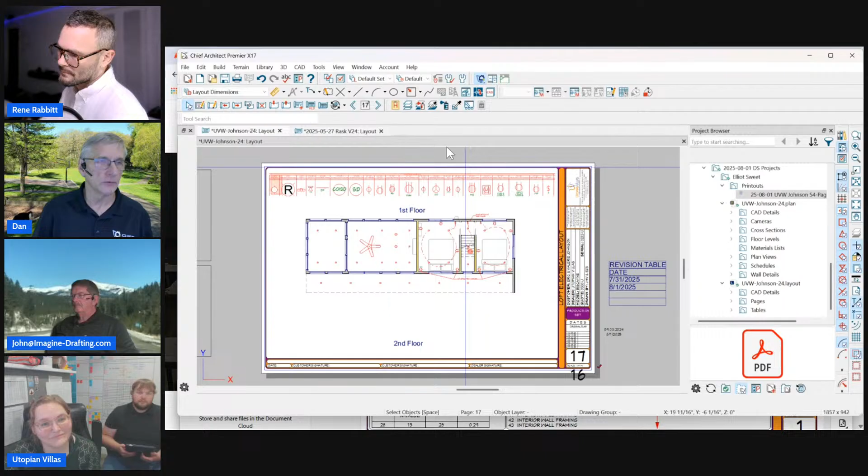Again, just little tweaks here and there to make it better - those callouts are really handy when someone's looking at your plan. You've been working on the plan all day, you know exactly where everything is, but if someone who hasn't seen it before looks at it, they go, where is that view you're referencing? And now they have to scroll through all the pages to find it, versus just in Adobe, you can click on the page number, much like you can in Chief, and jump right to that page without scrolling through every page. Just click on the page number.

I'll tell you a trick about double-clicking in the project browser, that'll open it up right away too. Yeah, that's true, but most everybody else would be looking at the PDF, not that. So here you could type in a page number and jump to it, which makes it much easier for people to get around in Adobe Acrobat.

Let me show one more trick before we close this out. Sure, go for it. Those people that are adding renderings to their plans, I hope you're putting in disclaimers about that.

I'm just going to show something that was kind of clever. You guys were doing something with CAD details, be it from layout or plan, but there's a benefit to putting stuff in CAD details, is that we get to rescale or frame things. So I've got a layout open here, and I'm going to get into the CAD details section of that layout. I'll make a new CAD detail and call it rendering 1.

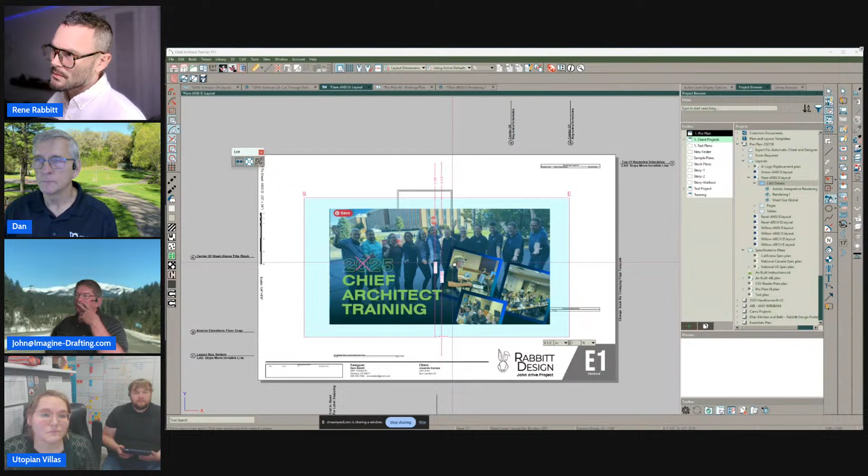And then in that rendering, I can paste my rendering. Let me scale it down to the sheet size there. And then I'm going to send this to the view. Now, because we sent this from a view, we get to use pan scale layout box. So now you can mouse wheel down and effectively change the scale of this, or you can even clip it by the layout box and crop and do stuff like that.

Right, so it makes it a little bit more dynamic in order to manage this, and obviously we can trade out the asset if we wanted to, but it's just cool kind of arranging on the page and getting it sized just right.

FYI Mike, this is a plan that's for in-house. You guys, Elliot and Jen, you wouldn't be getting permits for this because you're creating essentially mobile homes. Yeah, this is all for our guys out in the factory to be able to build. Exactly, so you wouldn't be submitting these to the city office or anything. So we're kind of covering some things that are for everybody. But I get what you guys are up to.

So hope that helps. And when you guys are creating cross sections, I personally love to do this. Details are more efficient in terms of getting them through to a build team. So I oftentimes will do a cross section, drop in a call out. The call out is linked to a detail, and then I'm just bubbling part of that section. So this lets someone know.

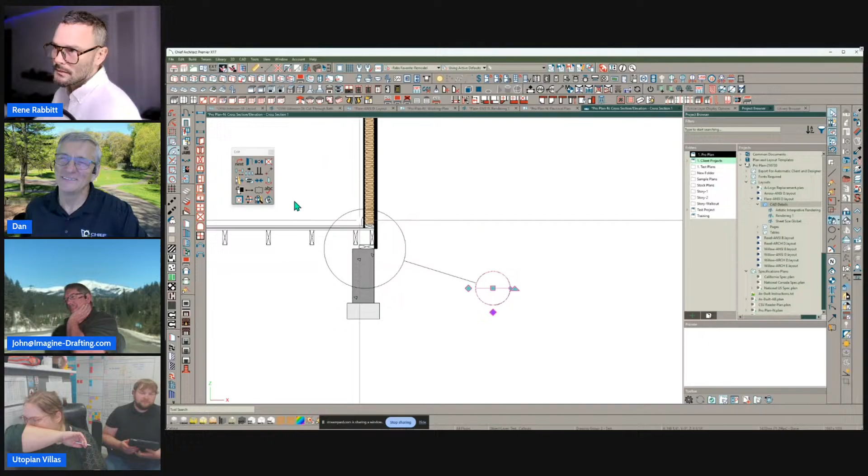When did they add bubbles? This is just a 25-inch circle arrow by default for this view. That's a great idea. So you get the detail, bubble it, super fast and easy, and then link this to the detail you need, and hopefully that detail is already sent to view. So that's fun, yeah, that's an easy one.

Awesome, all right guys, we got to go. Next time we're going to talk about some hacks, whatever hacks we talk about, to make things work better. Kind of like that little make that bubble bigger thing. That's a pretty good little hack. Yeah, that's an easy one.